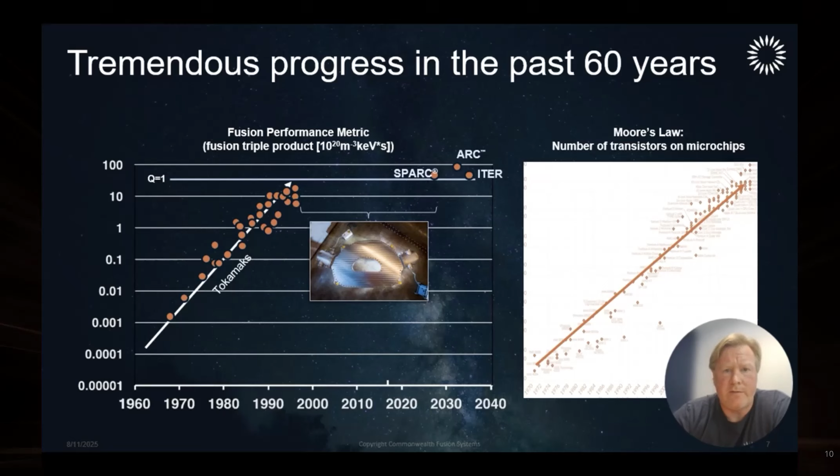And while it's not here yet, there's been tremendous progress on key fusion metrics at a pace that's faster than Moore's law. That progress stalled with the fundamental limits of key pieces of technologies. For CFS, it was magnets. For others, it may be lasers, or capacitor banks, or new simulation capacity, or new materials. All those advancements are arriving now and adding to the progress of the past, providing the path forward for commercial fusion. And so I do think that we'll have commercial fusion before 2035.

And CFS has been formed with the intent and purpose to do this. We have an approach based on proven plasma physics that's been peer-reviewed and delivered by the largest fusion company, with now over 1,000 people and more than $2 billion invested, and a team that knows what it's like to build hard things and knows what it means to manufacture at scale, who is actively engaged not just in the technology development but the ecosystem development, spearheading a regulatory path now codified into law where fusion plants will be regulated not like fission plants, but like particle accelerators.

The licensing can take a year or two, and that's a big improvement from the 10 years and $1 billion for legacy nuclear fission plants.

At CFS, we've taken a deliberate and systematic approach to risk retirement, starting with the physics from MIT's Plasma Science and Fusion Center, then moving to the magnet technology, which we demonstrated. We also demonstrated the ability to stand up a manufacturing line to build these novel technologies. Now we're integrating that known architecture with these new breakthrough magnets in our device, SPARC, here in Massachusetts. That project's now about 65% complete. And beyond that, we've already started work on ARC, our commercial power plant.

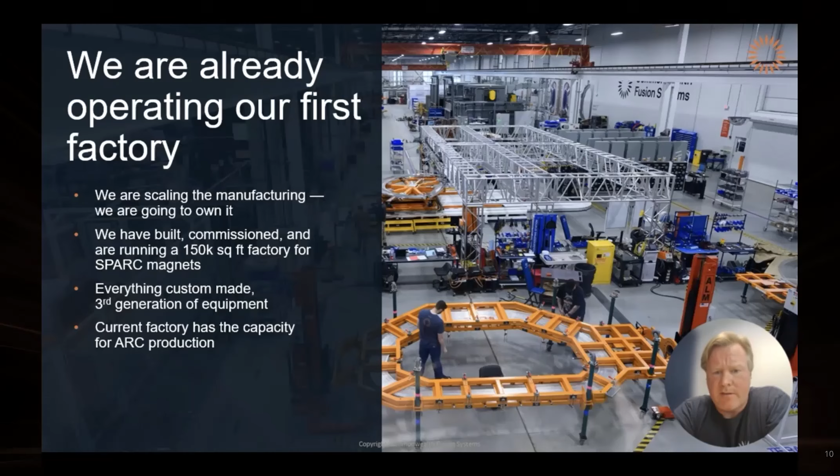At CFS, we've decided to vertically integrate on the key technologies we need. We're operating our first factory now, over 150,000 square feet of manufacturing in Massachusetts, with technicians working around the clock making magnets that will be used in SPARC. These magnets are some of the strongest in the world. We don't only make the magnets here, we also have all the test stands to make sure they're made with quality, providing the assurance we need to know they'll do what we need them to do when we need them to do it.

I'll show some pictures here. You can see some of our technicians working to meticulously insert some of the first superconductors into some of the first pancakes that will go into some of the first magnets for SPARC.

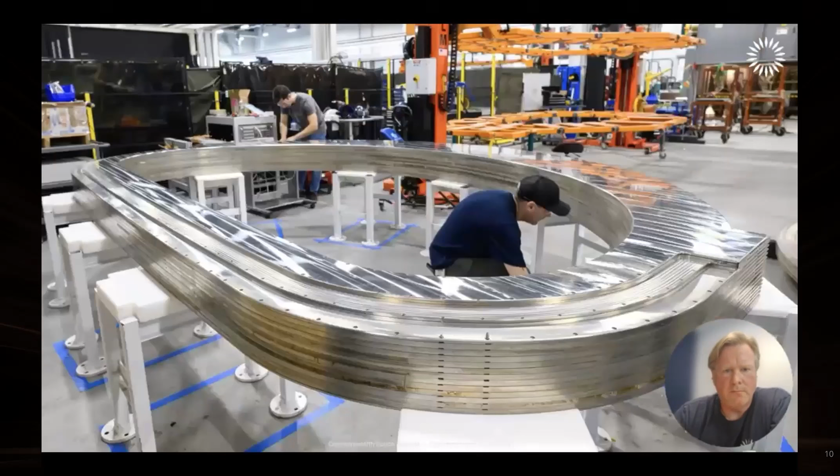Those pancakes are stacked together to make the big magnets, with the machines that put them in the right cases. The cases can withstand the enormous force that comes from magnets with tens of thousands of amps of current flowing through them. And these are the types of test stands necessary to show those magnets work.

And those magnets are going into SPARC, our pilot plant. This is an actual picture of the machine, not a rendering. It's more than 65% complete and on pace for operations in 2027. SPARC shows that a company like CFS can architect and engineer these types of machines, and that regional constructors and local talent, not the super majors, can construct a fusion machine. It includes a supply chain that stretches across 31 countries.

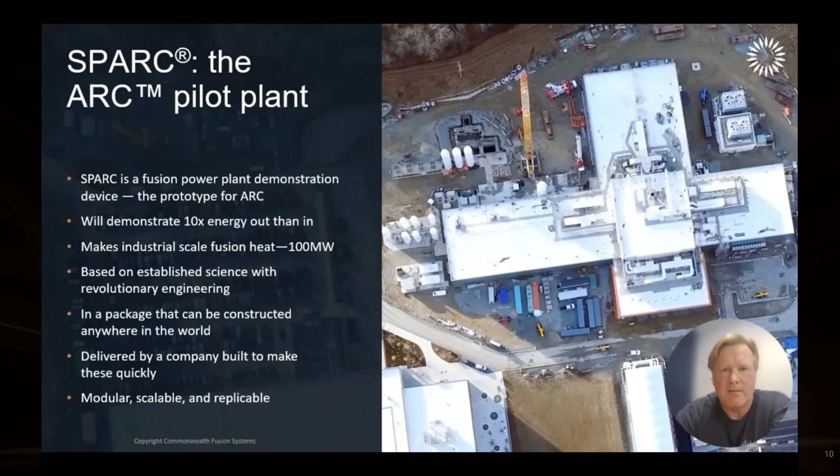Beyond the technology inside, which is truly impressive, SPARC is the proof point that CFS can execute on complex billion-dollar scale projects. And we have confidence that SPARC is going to work.

Self-critique is a core value of CFS, and from the beginning, CFS has been committed to holding itself accountable to science, engineering, and commercial progress. One of the ways we do this is through the peer review process. Since our inception, we have published more than 60 papers in journals detailing our science and engineering advancements. We use this to provide confidence to the scientific community, to our investors, and to ourselves that the fusion machines we are designing are going to work as intended.

But as I said, SPARC is really about demonstrating that ability to execute. Commonwealth Fusion Systems took over the role of architect engineer for SPARC, and since then has generated tens of thousands of work order packages to our construction partners to deliver.

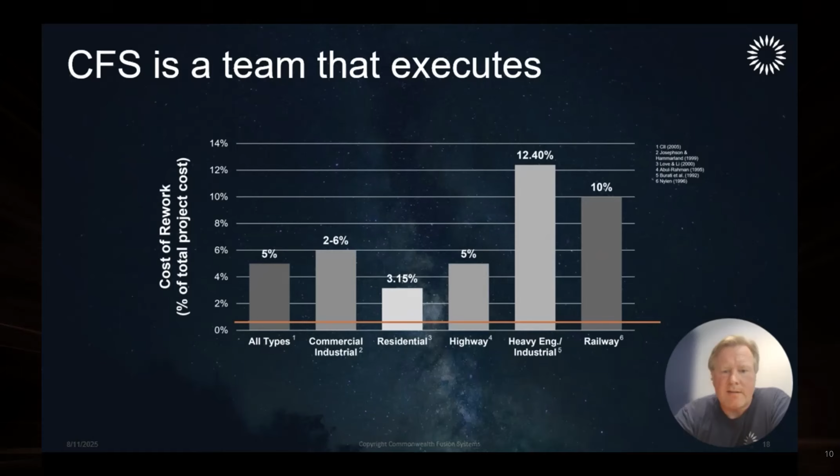In order to do this on the timelines we're looking to, we must execute with the highest level of quality. What we've seen is that through 15,000 work orders completed, we're now running about a 0.5% construction rework cost to date. That's exceptional, that's better than residential, and way better than what happens in heavy industry. It's a proof point of our ability to deliver these projects as designed and engineered.

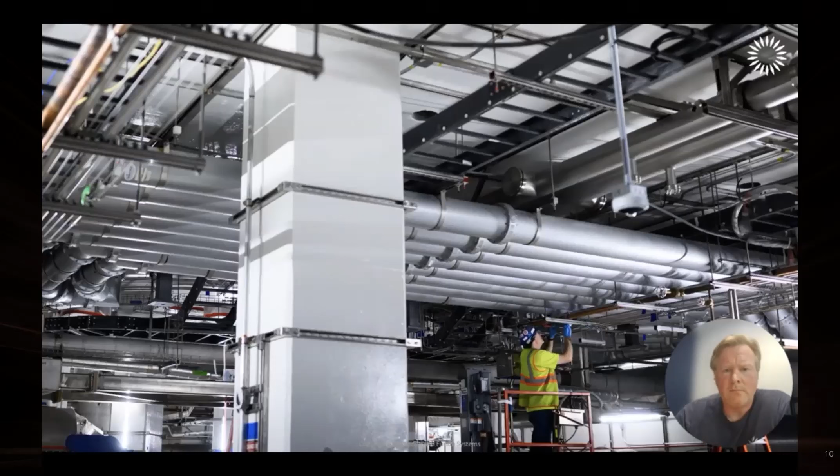And these things we're building, they're not little things. These are big, complicated, integrated and connected things. But things that borrow from other industries, like these large compressors similar to what's used in liquefied natural gas, to be able to deliver the cryogenic fluid to keep our magnets cold and confine the plasmas.

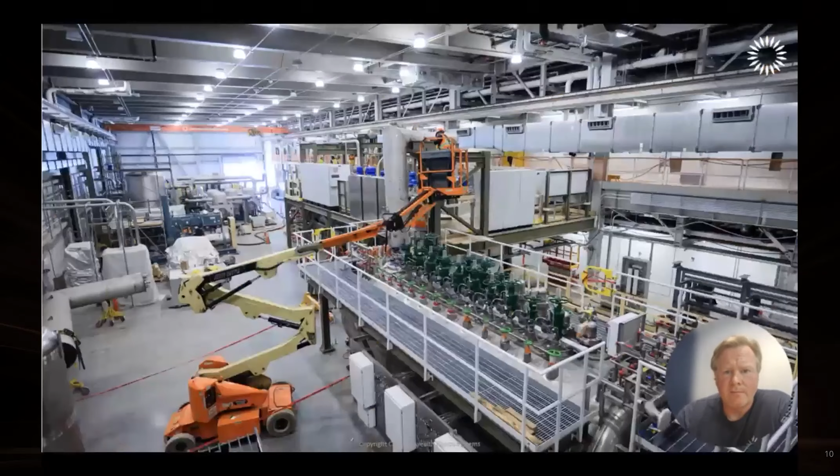And these are systems now that are being commissioned. So we have fluid in systems, we're running pumps, running valves, venting systems, turning them on, turning them off, getting operations instructions written for all these systems in order to support the tokamak operations.

As we move from building and system support construction into tokamak assembly, a lot of the long lead items that we ordered many months ago are now starting to get ready for shipment to CFS.

Ensuring the quality of those parts and those vendors around the world has been a big effort. So when I said there may be 31 countries in the supply chain, on a given day CFS has an employee in about 15 different countries working with our suppliers to ensure these items are delivered as expected.

SPARC will pave the way for ARC. Of the 17 systems you need to make a power plant, 13 of them will be demonstrated at appropriate scale inside SPARC, and the remaining systems are being tested and demonstrated in other experiments.

SPARC also will give us a lot of confidence in the commercial viability of ARC. Because we've been able to collect the receipts from over $1 billion spent, we now know how to make all of the major components we'll need for ARC, and we know how to talk to our suppliers to gain the estimates and costs, to give confidence to our investors that we'll be able to build commercially relevant and commercially viable fusion power plants in the future.

And while we continue to work on SPARC, a lot of our focus is moving towards ARC. This is where I spend most of my time thinking about. ARC will be our commercial power plant.

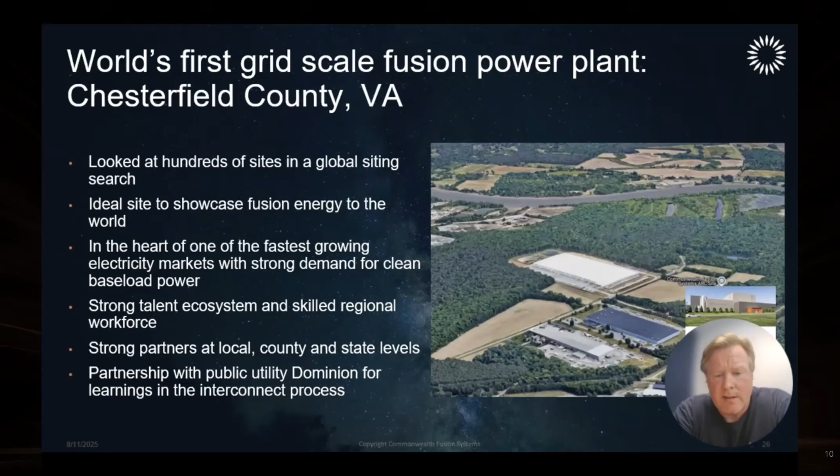But beyond that, it's also the site of some tremendous partnerships with the state and the county, and a lot of work going on to educate and inform our residents and our neighbors as we get ready to build our first power plant. That project's very much under development now.

We have an active zoning case. We're meeting and engaging with the county, the officials, and the community to get ready for that. So it's very much steps taken towards the permitting and actual development of that project.

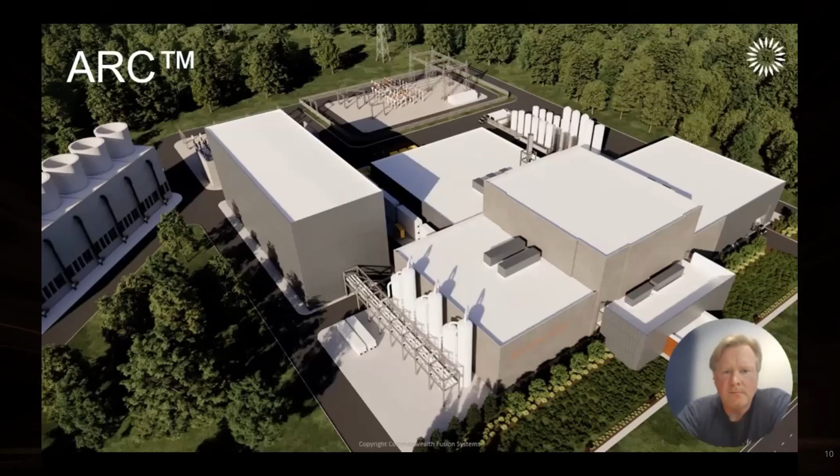Work's underway on the detailed design of ARC today. Here's a first rendering of what the plant may look like, sitting on about 25 acres of built-out land, connecting for the first time a steam turbine to a fusion device to make electricity and put that onto the grid in Chesterfield County, Virginia.

But in order to have a commercial industry, it's more than just a technology. One of the things I've been most impressed about during my time here at CFS has been the thoughtful approach to building not just a technology, not just a company, or not even just an industry, but a real movement around fusion. That movement requires educating and engaging stakeholders ranging from the next door neighbor here in Devens, about a quarter mile away, to heads of state and governors and leaders.

In between, there are a lot of people we work with in the form of the communities, our supply chain, the builders and technicians and constructors of our machines. That's a global approach to building a movement, not just here in the United States, reaching out to global leaders to try to enforce and develop the right types of regulatory frameworks necessary for fusion.

One of those key stakeholders is the regulator. The long work that's gone into educating and teaching them about the safety of fusion, both in the United Kingdom and the United States, now has us with a framework of appropriate regulations we can use here to grow an industry, but also that can be the template for other countries to take up fusion.

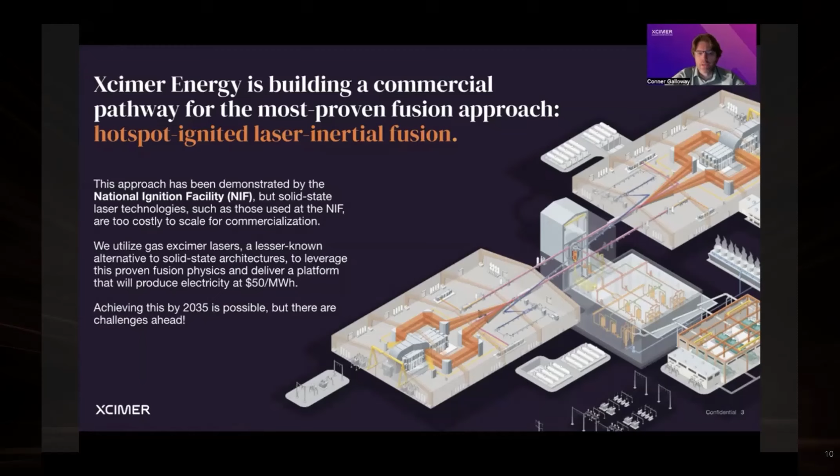So at Xcimer, we are using a lesser-known alternative to solid-state architectures, gas excimer lasers - hence the name of the company, just without the E - which are much more affordable in scaling to the energy levels needed for achieving robust commercial gain for inertial fusion. The low cost can enable great economics, giving us a path to producing electricity at a cost of energy of $50 per megawatt hour.

Laser inertial fusion is the only technology to date to surpass scientific break-even and produce a fully self-sustained burning plasma. Here is the performance of some fusion machines, with tokamaks there, and then NIF laser inertial. The record gain so far at NIF is a gain of 4.3. Just this past April, NIF achieved 8.6 megajoules of fusion energy out of a fuel capsule with 2 megajoules of energy used to drive the system.

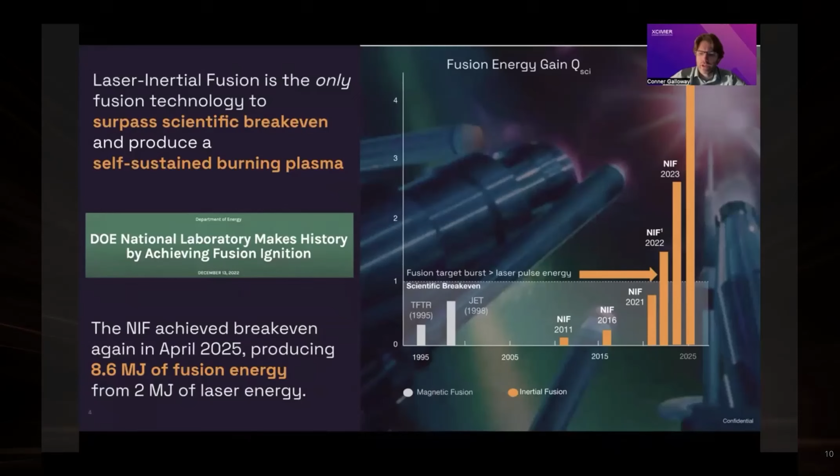Amazing achievement. What motivated myself and Alex to get started in inertial fusion was actually when we learned about what was called the Halite Centurion test program in the 1980s. This is not often discussed and not well known, but high gain inertial fusion was demonstrated during this program.

The key difference here compared to NIF was that in these experiments, X-rays generated from nuclear detonations underground at the Nevada test site were used to drive and implode laboratory scale fuel capsules. These experiments were successful, and the official statement from DOE says experiments conducted at the Nevada test site have demonstrated excellent performance, putting to rest fundamental questions about the basic feasibility of achieving high gain.

The details are classified, but Los Alamos National Lab, Lawrence Livermore, and the National Academy of Sciences all recommended the development of a laser architecture that could scale to 10 megajoule illumination, sufficient to replicate the conditions in these successful shots. So we're fortunate, based on these experiments, that we know a 10 megajoule laser is sufficient energy to enable commercial gain. Importantly, the NIF - National Ignition Facility - is only 2 megajoules because of the very high cost of the solid-state laser architectures that impede them from ever scaling up to 10 megajoules.

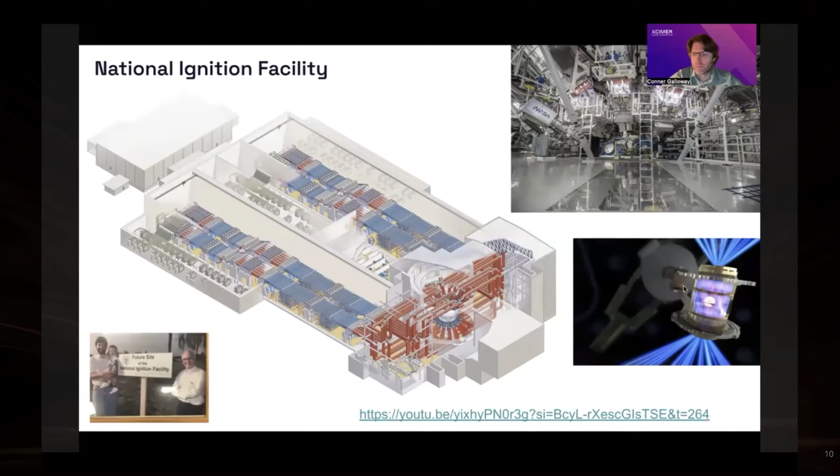So back to the National Ignition Facility. There's 192 beam lines that you see here in the picture, and all of these beam lines are directed to a target chamber and ultimately a hohlraum fusion fuel capsule, shown in the bottom right. The way NIF works is the laser energy is used to illuminate the inside of a heavy metal can.

The laser energy is converted into X-rays inside this can, and it's actually the X-rays that absorb on the fuel capsule, shown here in the middle. It's kind of a sub-BB sized ball, and it's the X-rays that drive the implosion.

It's important to note that this process is roughly 12% efficient, and it's called indirect drive. So on the NIF, while there's 2 megajoules of energy in the laser, only about 250 kilojoules is actually absorbed on the fuel capsule. This depicts the general process.

That energy is absorbed on the fuel capsule in the plastic ablator, and then the deuterium-tritium fuel is inside that. The plastic heats to tens of millions of degrees, blows off, and the fuel capsule is imploded, compressed, ignited, and a self-sustained burn wave is initiated.

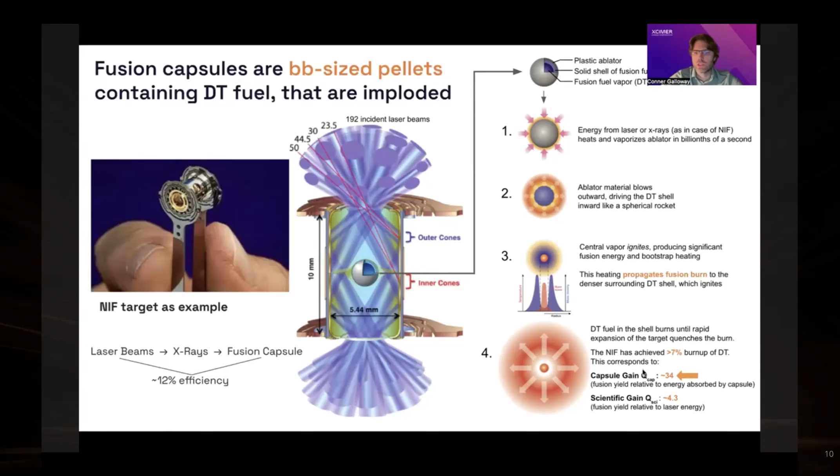What's very significant for NIF is that the gain of that fuel capsule was 34. They produced 8.6 megajoules of fusion energy on the record shot, with only 250 kilojoules coupled to the actual fuel capsule. So what we're doing differently than NIF is we have a different illumination geometry, and we're shooting a much larger fuel capsule.

Here on the left you see NIF with 192 beams. We're just going to use 2 beams with much higher energy, and so we'll be able to couple over 8 megajoules to the fuel capsule, whereas NIF is only coupling 250 kilojoules.

The way we can do this is we can beam-shape our laser beams so that the intensity around the ring of the laser spot is higher by about a 2-to-1 contrast. When you do this and absorb the laser in the target plasma corona, you can get spherical implosion from two-sided illumination.

We published a paper on this target design concept with all three major design labs: Livermore, Los Alamos, and the Laboratory for Laser Energetics, and General Atomics. It was an editor's pick in Physics of Plasmas, so I encourage anyone interested to dive in and read the paper.

So of course, how do we get to coupling over 8 megajoules to the actual fuel capsule? We need to lower laser cost, and that's what we're all about at Xcimer Energy. We're cutting laser costs by replacing glass with gas to enable commercial IFE.

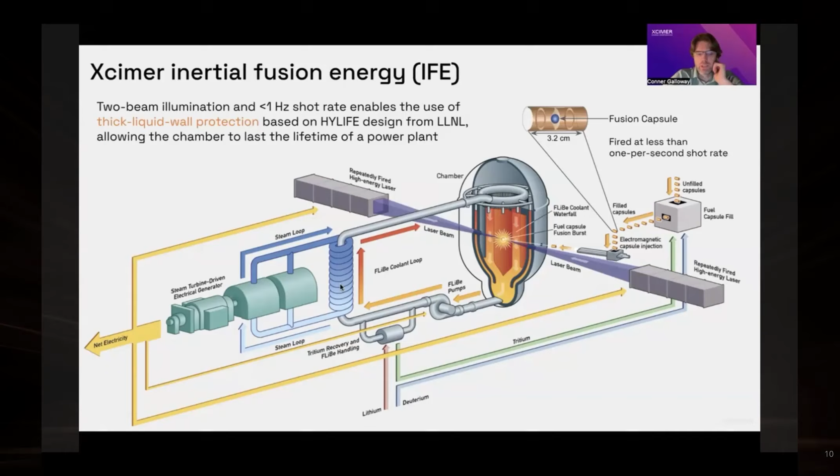We'll be shooting one target every few seconds, a few gigajoules of yield per burst, and collecting the energy in the FLIBE, which then you have to extract the tritium from to fuel future targets, and then take the heat away from the FLIBE to power a standard steam cycle.

So in summary, lower laser cost enables us to build a much higher laser energy than NIF. This enables us to shoot much bigger targets in the robust gain regime of the Halite Centurion experiments to achieve commercially relevant gain.

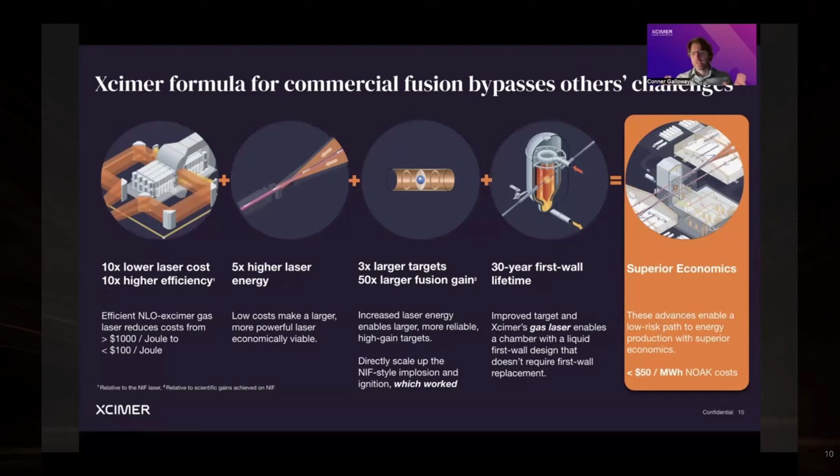The laser architecture enables us to use thick liquid wall protection so that our chamber can last the lifetime of the plant. This is our roadmap to how we can drive the cost of an nth-of-a-kind plant down to $50 per megawatt hour.

Our roadmap has 3 major phases. The first, Phoenix, is where we're demonstrating the gas optic, gas mirror technology I described earlier, as well as demonstrating that we can build KrF lasers at a microsecond plus pulse length, so we really understand how those lasers operate. The next major phase of our program is Vulcan.

This is our break-even machine, where with a 4 megajoule laser, we'll achieve wall plug break-even—meaning more fusion energy out of the burst than the laser took off the grid electrically. This system will be upgradable in place directly to 12 megajoules, where we'll be able to serve several national security applications, such as stockpile stewardship and nuclear weapons effects testing in this Vulcan break-even machine.

Then finally, by the mid-2030s, we'll build Athena, which is our fusion pilot plant to deliver electrons on the grid. This is showing a depiction of the progression of our Xcimer, or KrF, laser technology. The first 2 steps are part of the Phoenix program that I just showed on the prior slide.

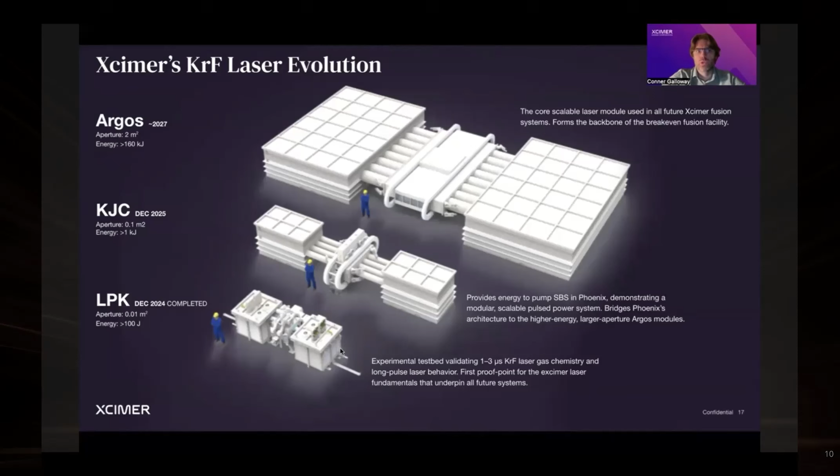The Argos module is part of Vulcan and Athena. Argos is what we will mass produce—these laser modules for all future systems. The LPK stands for long pulse kinetics, and the kilojoule system are our prototype systems that will enable us to develop new pulse power technologies and benchmark all of our laser codes so we can design the Argos module.

LPK—here's a picture of a before and after. On the upper left is an early design shown virtually in place before we raised our Series A. We completed this on time and on budget by the end of last year, and it is now fully operating, and we're actively benchmarking our laser codes and informing the design of the Argos laser module.

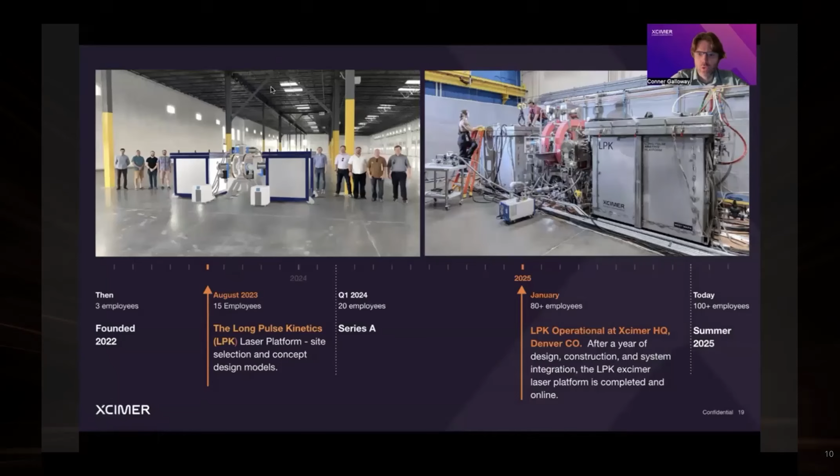Switching gears a little bit to thinking about what is needed for fusion on the grid by 2035. First, fusion performance—I think most approaches require a break-even demonstrator along the way. You have SPARC for CFS, you have Vulcan for us. Other approaches have similar concepts. It's really important for a given approach to demonstrate wall plug, facility, or engineering break-even.

All those terms are very synonymous. Finally, experience—fusion startups need to learn by doing. This is important because the past major big machines, like the Z machine, the Jet Tokamak, NIF, were all built decades ago. So the designers and builders have retired, and these were one-offs, so supply chains were not industrialized to support mass manufacture of the components for these one-off machines.

So companies have to learn by doing. Companies have to not just learn how to build complex machines, but learn how to build teams that can build the complex machines. This takes a lot of iteration, and this is sometimes often overlooked in thinking about timelines.

Also, talent—you need the best people in the world. As I mentioned, there's a lot of great scientists who worked on the development of the machines in the government decades ago that are now in their 70s and even older. So companies need to consult with these individuals.

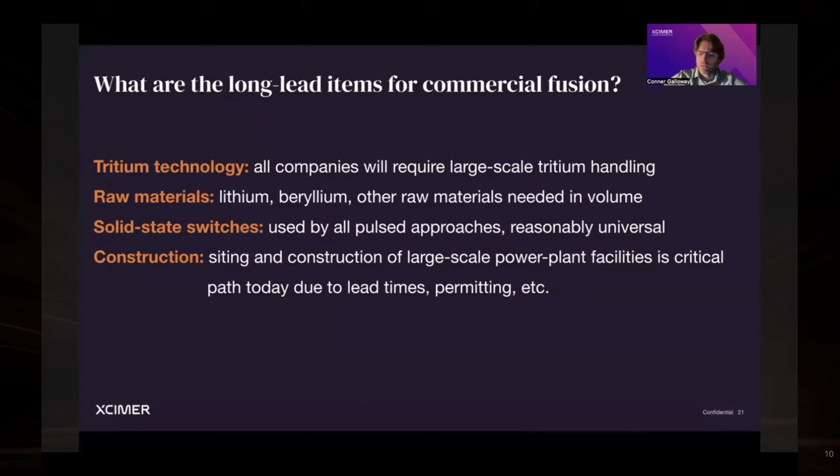Solid state switches are used by all pulse power approaches, including Xcimer Energy, since our lasers are pulse power devices, and this technology development is a 5 to 10 year time frame. Finally, construction, siting, and permitting—states need to get educated on how to license not just reactors but break-even machines, and this takes time and design cycles.

Finally, I want to comment that fusion is a global race, and China is moving fast. China is currently building a larger version of NIF in Mianyang. There's a lot of debate as to what energy level this will be at, but it seems like it will definitely be over 3 megajoules, and they have the billions to spend to build a solid state system at several megajoules of energy. Xcimer, on the laser side, is the only path for the US to compete on both speed and laser energy in order to compete with China.

Because if China builds this, they're going to have a stockpile stewardship capability that surpasses the United States. So it's not just energy security but other national security items the US needs to be concerned about with respect to China. Finally, to conclude, we need more money in the Milestone Fusion program—only $50 million was allocated to 8 companies, whereas in the NASA COTS program roughly $500 million went to 2 companies. We really need to step up our game in the United States, educate members of Congress and the public on the importance of public-private partnerships, and bring more money into the program.

And with that, I'll conclude and thank everyone for listening to me talk a little bit about Xcimer and our views on the fusion industry. Thank you.

Hi, my name is John Tomko, and I'm the Principal Product Development Leader for Capacitor Film here at Peak Nano. We're a supply chain company working on providing a solution to power handling, particularly in the form of vastly improved dielectric film in order to replace current polypropylene capacitors.

I know that's different from most of the fusion folks, but hopefully this ties in later and we see the importance of it. The outline should be pretty straightforward: since we're not a mainstream fusion company like most presenters, I thought it'd be useful to give some background on Peak Nano and our efforts overall, which will naturally segue into a discussion of our core technology and how it's differentiated from current market options, with particular emphasis on how this fits into the fusion ecosystem.

I'll then wrap this up with more discussion on fitting into that ecosystem further, by providing context on our experience with the fusion supply chain in areas where I think we can put particular emphasis within the fusion community to improve the supply chain as a whole.

I'll start with Peak's introduction. We have this mission statement of delivering nanoscale technology with macro-scale benefits across a number of sectors. What this really means is that we use a bottom-up approach to material design that lets us make a new material that fits into pre-existing systems. It's a drop-in replacement. We aren't trying to make new quantum computers or anything like that. You'll still end up with a complete macro-scale capacitor, in this case, but this layered metamaterial-based design gives you much better net properties than what's currently on the market.

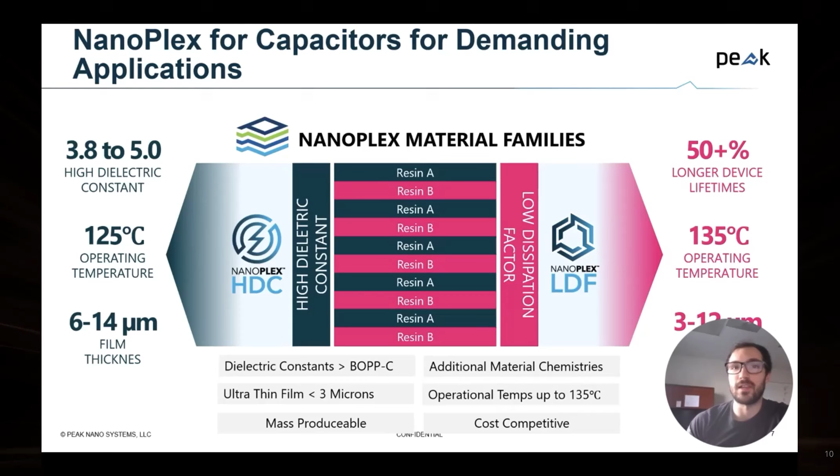Again, the current industry standard I keep mentioning, polypropylene, specifically what I'll now refer to as biaxially oriented polypropylene, or BOPP, just for simplicity. This is where polypropylene is extruded into extremely long sheets of plastic - we're talking 40,000 meters length, typically the manufacturing limit. Then we take that film and stretch it along both axes. This stretching process, this biaxial orientation, really orients the crystalline domains within the material. In doing so, you take an okay dielectric material like polypropylene and give it significantly better dielectric properties. BOP is pretty much the standard across the world for all energy applications.

If you go to the grid, for example, you'll see large substations running hundreds of BOP-based capacitors. The reason for this is mostly because you can intrinsically scale the manufacturing to this as needed, and it gives you dielectric properties that are pretty okay.

Just for a sense of the manufacturing scale, we're talking about probably about 1 billion pounds of material a year just in power generation. Again, this is because of BOP's excellent manufacturability - it has pretty good room temperature dielectric properties. But even with all that being said, it still falls short in some ways.

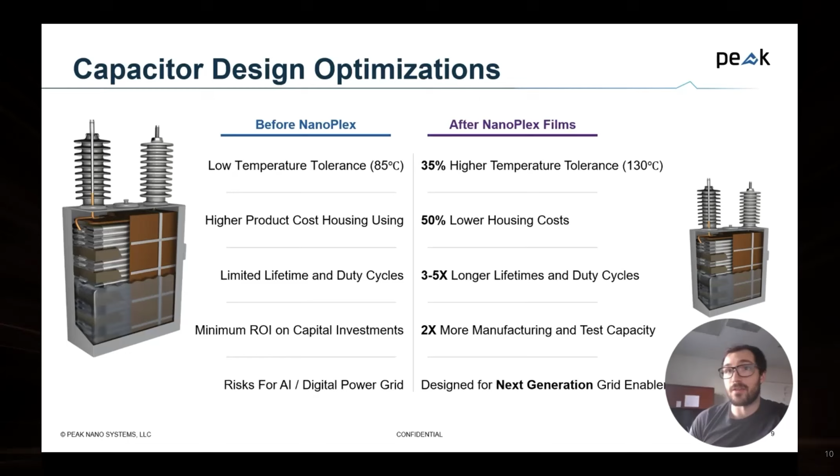A really good example of this is HDC, the high dielectric constant material. I'm going to jump back and forth between the two material systems here. We can see the variety of properties, and as soon as HDC is compared to BOP, we're getting a factor of 4 volume reduction just because of the improved energy density of this raw film.

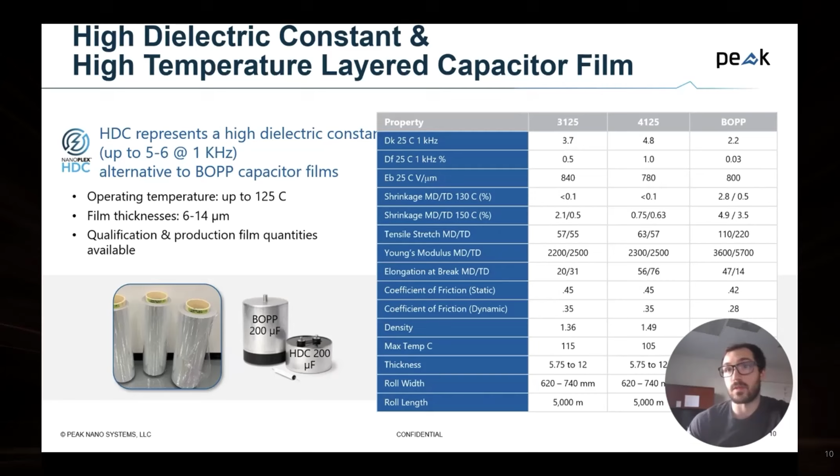This isn't to say it's the perfect material with no trade-off. You can't put this in every application, to be clear. There's a measurable increase in the dissipation factor, but that's not all that matters—you can play some tricks to improve your equivalent series resistance. For pulse power applications, where energy storage density really is your primary factor, this becomes an excellent material system compared to BOP. You can tune the properties between 3.7 and about 5-ish across the different product ranges Peak Nano offers.

So again, you have that aspect of tunability for different material systems or needs in the power grid. When we're talking about non-pulsed applications—running at really high frequencies or just DC current applications—you're really talking about heat resistance as the primary factor of interest. I'm intentionally using the term heat resistance loosely because it's a really nuanced aspect when we start thinking about it.

In some situations, like in power electronics where we're implementing silicon carbide everywhere and it's naturally being pushed to 200C operational limits, I'm using heat resistance in the form of whether the film can sustain the same operational temperature as the device itself. Because if it can, I remove the need for active cooling. In other words, my capacitor can run at 200C or very high temperatures without active cooling, and my engineering constraints are simply reduced.

But there's also this hidden secret on the longevity of the capacitor in terms of heat resistance. When the capacitor is run at any temperature above room temperature, BOP gradually gains a derating factor where its capabilities are reduced from room temperature. And just from internal heating, the temperature of the capacitor can easily reach 100C in terms of hot spots, which leads to derating. This derating is usually in the form of lower operational voltages, but it also leads to reductions in lifetime.

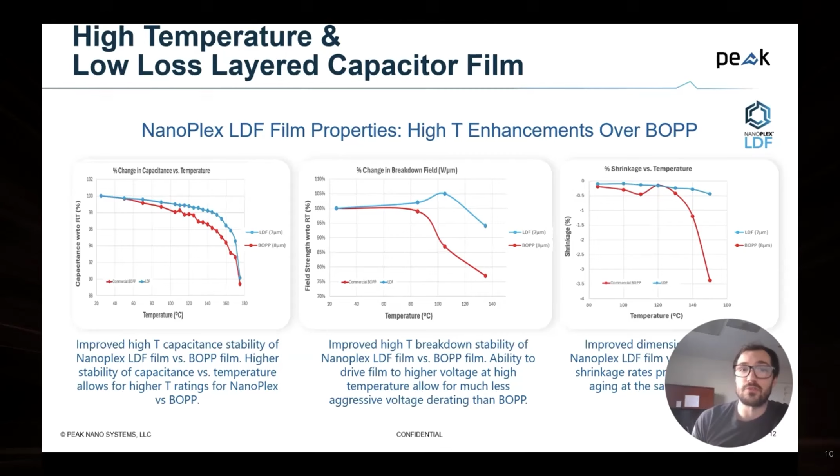To highlight this more clearly, consider two capacitors made identically with our LDF film versus traditional BOP. In the case of BOP, the capacitor actually has to be derated by over 30% at 125C, whereas Peak Nano's LDF film only loses 5% of its peak performance. The same is true for that LDF film's energy storage density or capacitance, which can operate significantly hotter. This increased cutoff limit on max operating temperature leads to a direct correlation in net lifetime, where small hotspots in the device, in the case of LDF, don't lead to detrimental thermal runaway because the capacitor is more tolerant to these conditions.

And so this thermal stability is really the direct result of Peak Nano's core technology, which is the production of nano-layered polymeric films. In the case of LDF, the direct drop-in replacement for BOPP, we have much better lifetimes and thermal stabilities. This is achieved by taking the same cap-grade polypropylene you find in every other capacitor and layering it against a high glass transition glassy polymer.

In doing so, the polypropylene effectively becomes stuck within these rigid, well-defined boundary layers. This means as temperature or other stresses are applied to the film, like high voltages, the material resists strain and becomes locked in, giving constant performance. Because the material is primarily polypropylene, the cost is actually very comparable to BOPP, and it drops into the same capacitor system with minimal additional engineering effort.

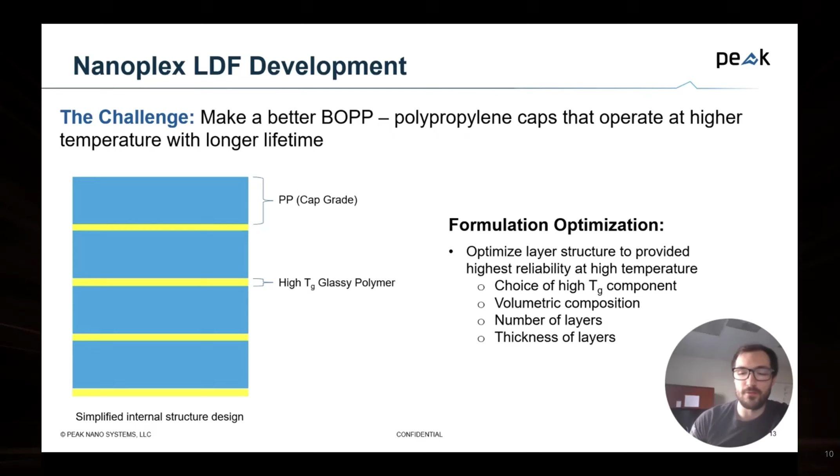So now, I showed that nice SEM micrograph earlier, and I'm used to seeing micrographs of this perfect 100 nanometer region of a super lattice—everyone calls it the next big thing in their Nature paper, and then you never see it go anywhere, mostly because if you move a little bit over, you start seeing interlayer mixing and things like that.

With all this technology, Peak Nano is really making material that can greatly improve the quality and lifetime of capacitors, particularly for the high current needs you're seeing in the fusion community right now.

While our obvious customers are capacitor manufacturers, since we make the raw film, these capacitor manufacturers will take their capacitor and sell it to someone building a power module or capacitor bank, and that system is what you'll end up buying as the end user of a fusion company, maybe. So at the end of the day, Peak Nano is pretty far up the supply chain, admittedly.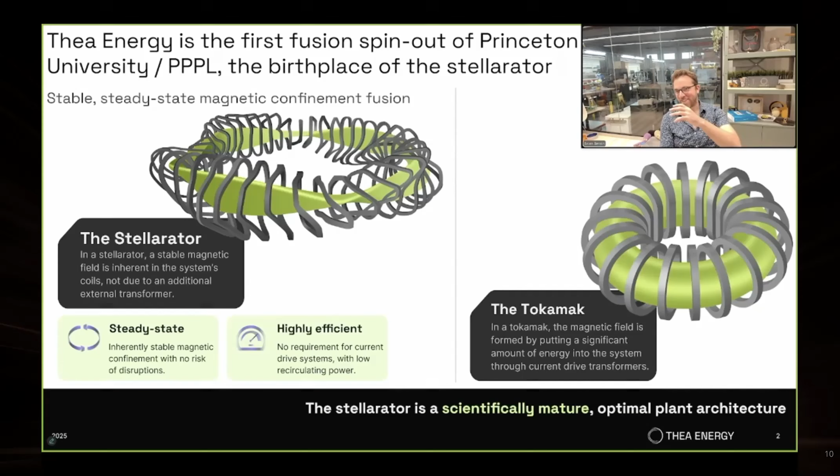A number of these devices that were built went 10 years behind schedule, billions of dollars over budget. And while that's allowed for a first-of-a-kind scientific research project, if you're building a power plant based on these technologies and the result is billions of dollars of cost overrun and a decade of schedule overrun, that's not a very good product.

So the foundational concept behind Thea Energy is how can we eliminate from hardware precision and complexity? To be clear, we're not proposing any magic bullet here. We are not eliminating precision and complexity outright, but what we are doing is we're transferring it from hardware to software. So within our architecture, we utilize an array of about 400 planar superconducting magnets.

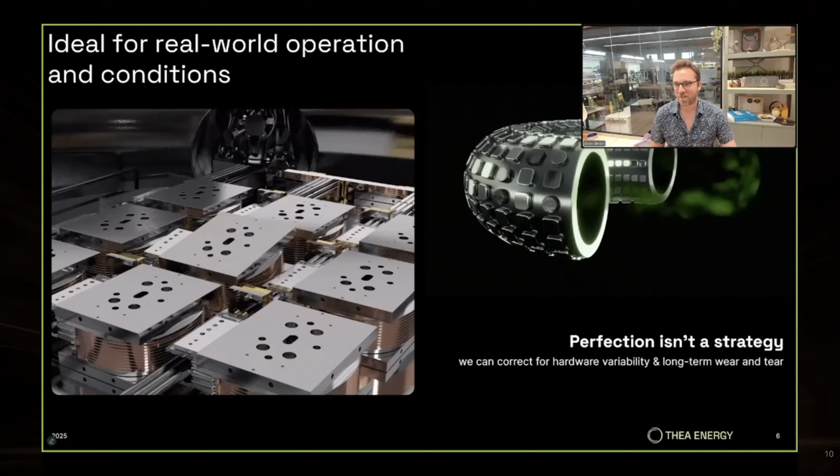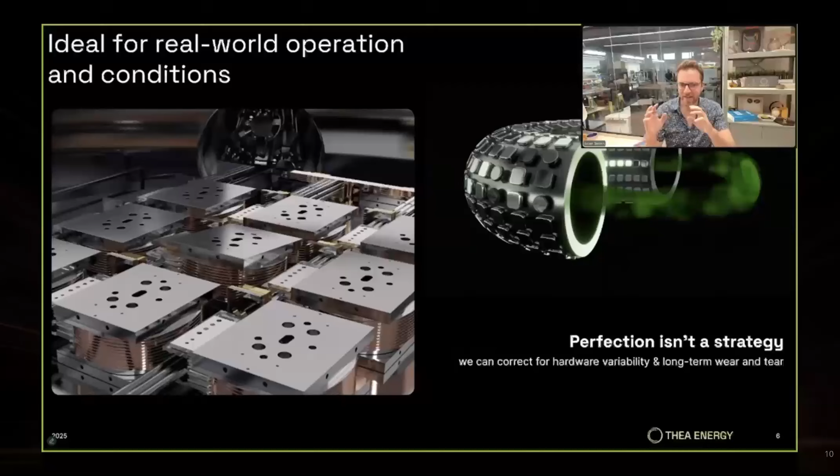Most of fusion right now is focused on perfect lab environment conditions to make fusion happen for a fraction of a second. We at Thea are really trying to focus on what happens when magnets or other system structures wear over time. That's something that allows us to have a system architecture that can self-tune, that can dynamically change parameters as this happens over the course of days to months to years. Therefore, you'll have a device that continues to run at a higher capacity factor with a lower O&M maintenance cost. That is the practicality that we're really, really focused on.

Another major advantage that we've really just started to uncover here is by having a software layer that touches all parts of the system and can tune things, we now have an architecture that over time we can actually provide the system with updates. So there are parts of this world, especially for fusion research and plasma physics, that we're continually advancing, and we're continually getting better at it.

Turbulence modeling and suppression is one of those areas. Over the next 5, even 10 years and beyond, we will continue to have better models and simulation tools for understanding turbulence, and ultimately making lower turbulence in your device. For most other fusion architectures, if you learn something new, you redesign the system and the next one is better. But this one is kind of stuck where it is forever.

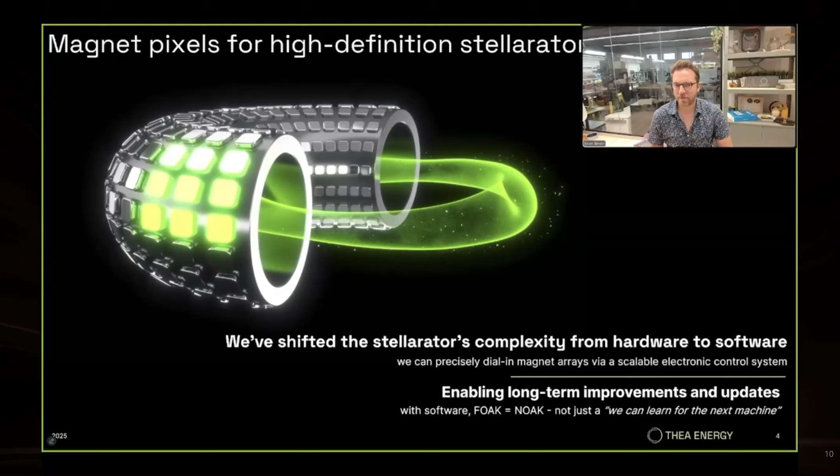With this architecture, with this phased array approach to the Stellarator, we have an advantage to provide the system with a software update, a control system update, and therefore actually have higher performance even though the fixed hardware is the same. So this enables continual improvement of a fixed asset rather than just learning and doing better for the next machine.

So I've spent a couple of minutes talking about the advancements and the results to date with our hardware. I want to talk a little bit about where we're going and the path to actually commercialize this technology. We're getting really good at manufacturing these superconducting magnets. We're scaling up production. We've built the control systems that we need. The next step for us is to build an integrated system based on our technology.

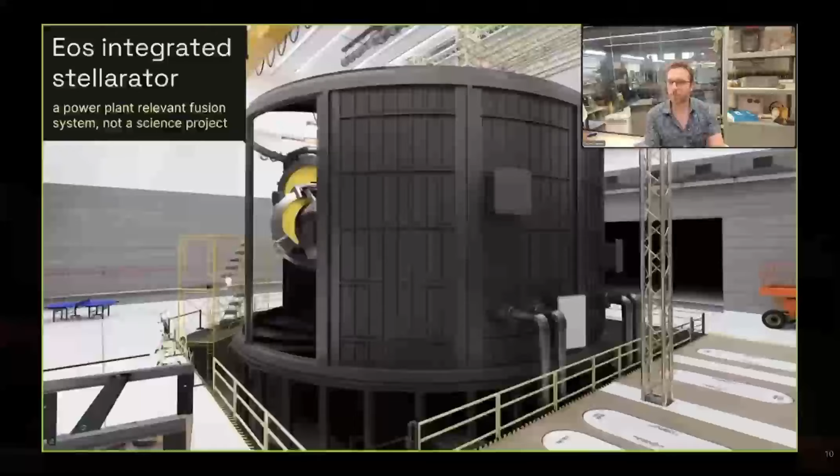This device, which we call EOS, will use our planar coil system architecture to create a decent high triple product, and also do so in steady state, as pretty uniquely only the Stellarator can do. So this device is our proof of concept that not only shows an integrated system fusion performance, but just as importantly is a 70% linear scale of a power plant, a large scale system that allows us to do all this systems integration, procurement, and engineering of a power plant scale device.

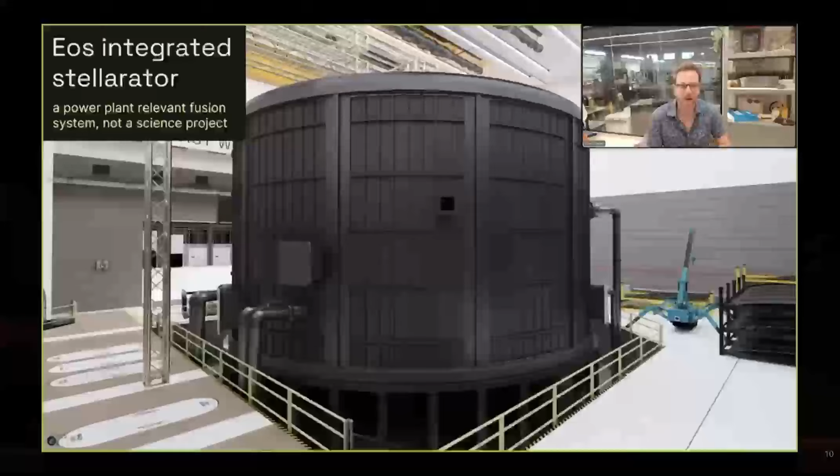Science is really important to fusion. Technology and engineering are really important to fusion. A lot of the practicality of operating utility scale power plants comes with the execution and buy down of programmatic risk of actually constructing the device and the facility. So this upcoming project, which we plan to have operational around the end of the decade, allows us to go one step further than just system technology development and scientific verification. It allows us to buy down the programmatic and execution-based risks of a power plant scale asset.

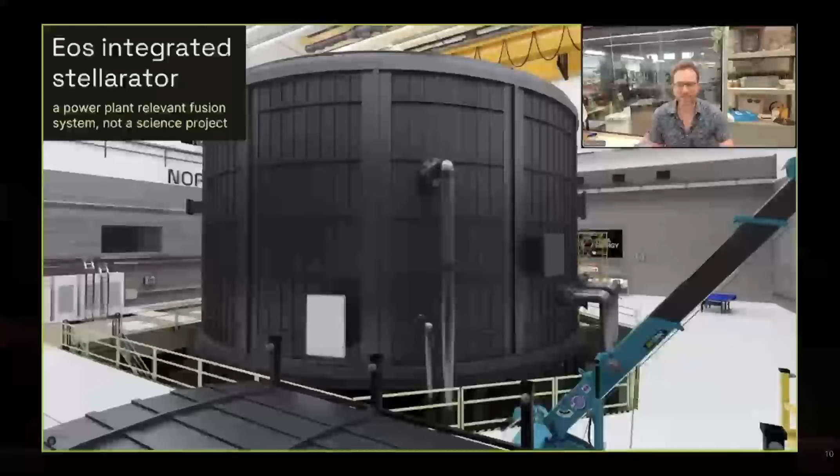So for this device, we're going to be nearing about the 10% design completion later this year, at which point in 2026, next year, we will actually choose a site as to where to build this. So some really exciting stuff coming up for Thea Energy. By designing, constructing, and operating that device, we have a really clear path to how we commercialize the technology and its final architecture, a power plant.

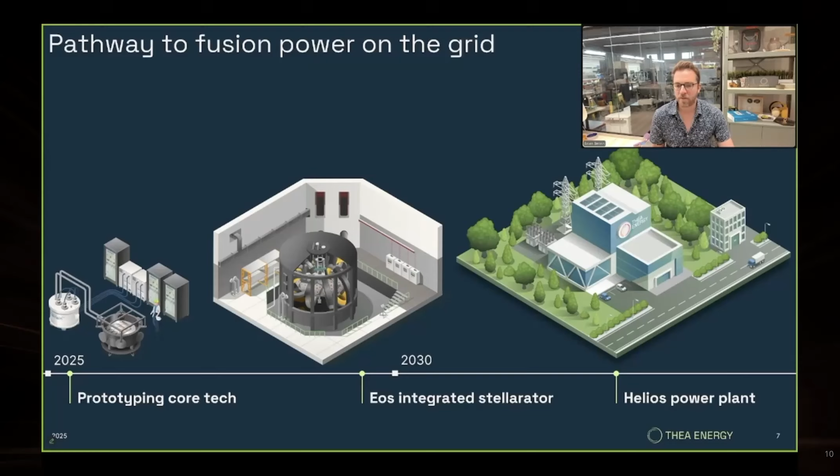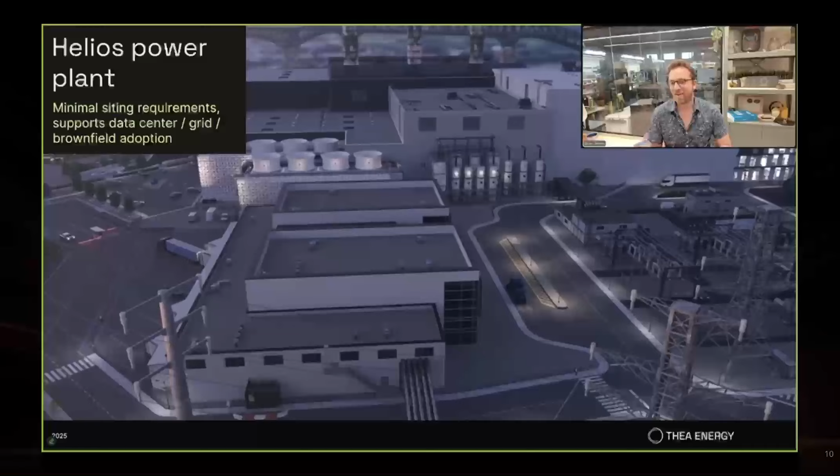So this device will be a scale-up of EOS. It will also change the fuel mixture. EOS will be a DD fusion device. It will be subscale. We are going to be working towards a DT fusion power plant. And by changing the fuel mixture to DT, scaling up, we will have a very efficient system in terms of its ability to create on-the-grid electricity.

Double-clicking in on that one for a second, within the various fusion architectures being proposed now, a lot of people are thinking about Q greater than 1 on a scientific basis. The advantage of the stellarator that we're really focused on commercializing is, back to the beginning of this conversation, relating to the steady state nature of that plasma.

So the stellarator shines because in a stellarator you can reach this point of ignition. Ignition is a self-heating plasma where you get to turn off a lot of the energy recirculation. And that allows you to have an architecture that creates a lot of energy, which you can then put on the grid rather than having to pump it back into the device to restart a reaction, to squeeze a plasma.

There are a number of different ways you would potentially want to recirculate energy in inertial confinement and other forms of magnetic confinement. But for the stellarator, it's a complicated system with that very specific French cruller shape. If you can make that device, you can create a highly efficient power plant architecture where most of the energy created can be utilized for the real goal: to create electricity and put energy onto the grid. So we're really excited about the path to commercialize the stellarator, because building an integrated system that is steady state scales from an economics perspective very nicely to a power plant.

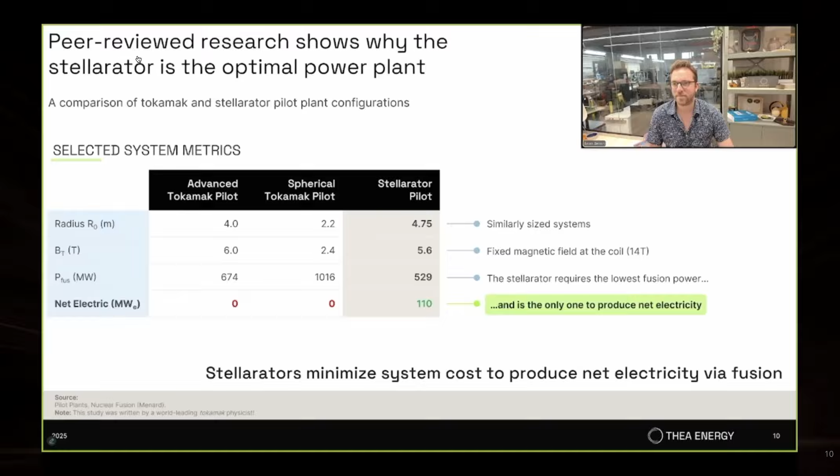I'm Will Regan, president and co-founder of Pacific Fusion, and I'm here today to tell you about our plans to develop affordable power using pulser-driven inertial fusion, with net facility energy gain by 2030 and the first power generation by the mid-2030s.

There were three major breakthroughs that happened in 2022 that really transformed the fusion landscape. First, the National Ignition Facility used lasers to drive the first controlled fusion ignition, achieving the physical conditions needed for commercially relevant fusion. However, since the NIF's lasers are less than 1% efficient, we still need a more energy-efficient way to access these physical conditions. Fortunately, at the same time, Sandia's Z facility reported record-setting pulser-driven inertial fusion results using a much more energy-efficient path to ignition than lasers.

By driving their MagLIF concept with a pulsed electrical current, Sandia achieved the second-highest fusion performance ever, second only to laser fusion. This MagLIF approach has the added benefit of using lower-complexity targets, which will further ease the path to commercial power.

And lastly, that same year, the team at Lawrence Livermore National Laboratory, led by our now CTO Keith LeChien, demonstrated an even more energy-efficient and mass-manufacturable pulse power technology than what's used on the Z facility. This new pulse power technology is called an impedance matching Marx generator, or IMG, and it opens up a path to build practical and cost-effective fusion machines. So when you take these three things together, it shows that we can achieve conditions needed for commercial performance, that we can get there energy efficiently, and that we can do so with affordable, mass-manufacturable hardware.

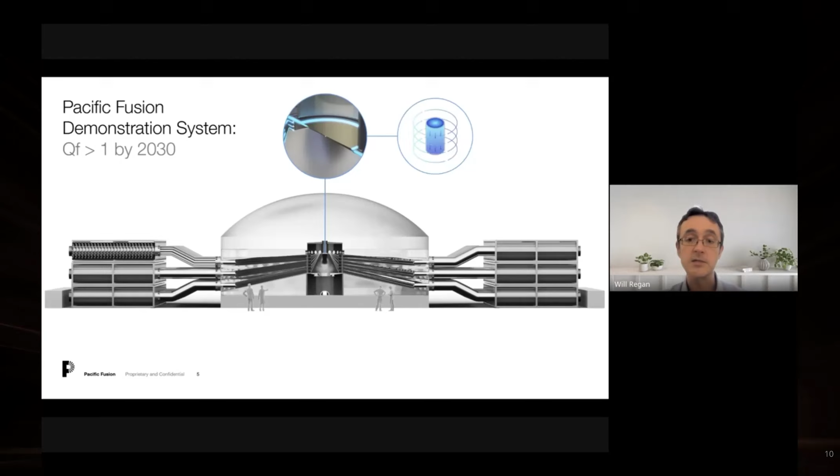So if you look at that overall, it's roughly 1,000x increase in performance per cost. And if you compare us to other major facilities like Z, we can drive over 2x more current through our targets, over 60 mega amps compared to Z's 25 mega amps of peak current. And that's important for us to get the conditions needed to get not just ignition, but facility gain, high gain.

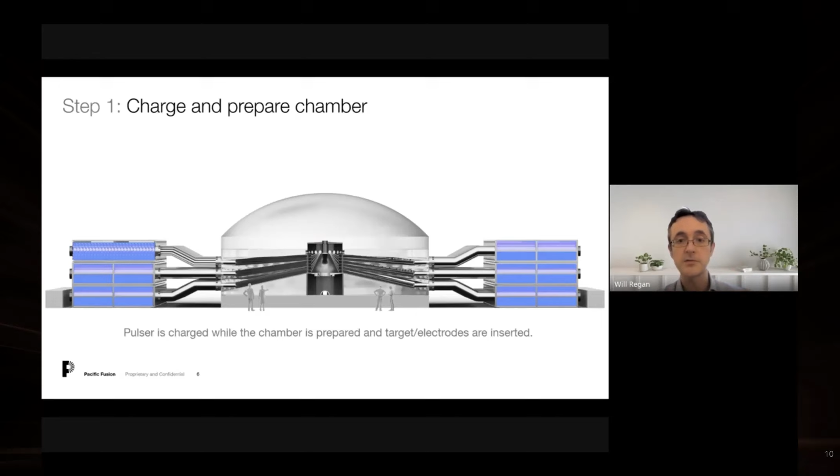So here's how the system works. Effectively 3 steps. Step number 1, you charge up your capacitor banks while you load a fuel container in the central fusion chamber at the center of the machine. Step 2 is you discharge those capacitor banks, sending a large electrical current pulse traveling inward along these transmission lines, these wires. And then third, you direct that electrical current to a tiny fuel container, our target, that holds a few milligrams of DT fuel inside.

And that electrical current creates a very strong magnetic field that rapidly implodes the can and squeezes the fuel up to fusion ignition conditions and high gain.

In our demo system, we'll be taking only about 1 shot a day and measuring all the output with a sophisticated suite of diagnostics. You can read about some of those diagnostics in our AMPS paper - affordable, maintainable, practical, scalable. It's our technical roadmap we shared on the arXiv a few months ago and is coming out in a peer-reviewed journal shortly.

In a power plant, though, we'd be harnessing that output and using the neutrons to breed more tritium in a blanket.

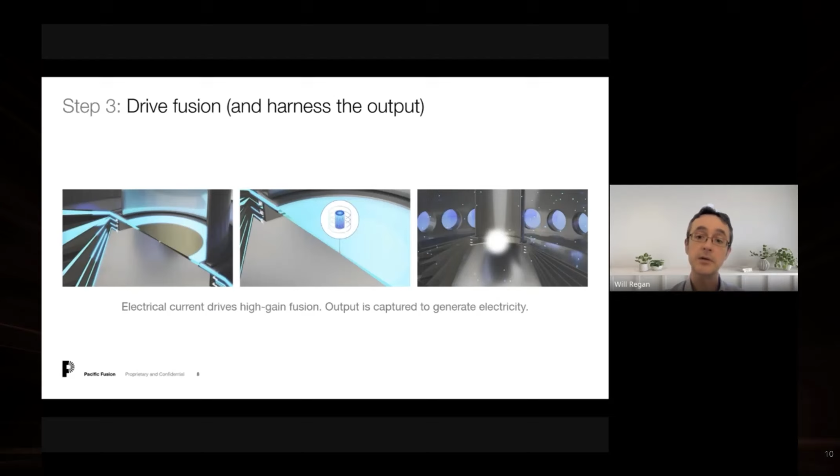Okay, so I've showed you what we're building to achieve net facility gain by 2030. What else do we need to make power by the mid-2030s?

So we'll actually need to build a new system that looks pretty similar to the demo system. Same footprint, roughly about the same amount of stored energy. The main difference in this new system is that it has to cycle not just once a day, but about once every second or a few seconds.

We'll also need to capture that energy output to generate electricity and siphon off a small fraction of that generated electricity to recharge the pulser and to power other systems. And then finally, we'll need to close all of the material loops.

So after every cycle, every target we fire, we'll need to capture and recycle all of the unburnt fuel. We'll need to capture and recycle all of the non-fuel target materials, and we'll need to process the blanket that's catching all the neutrons, breeding tritium, and capturing the heat.

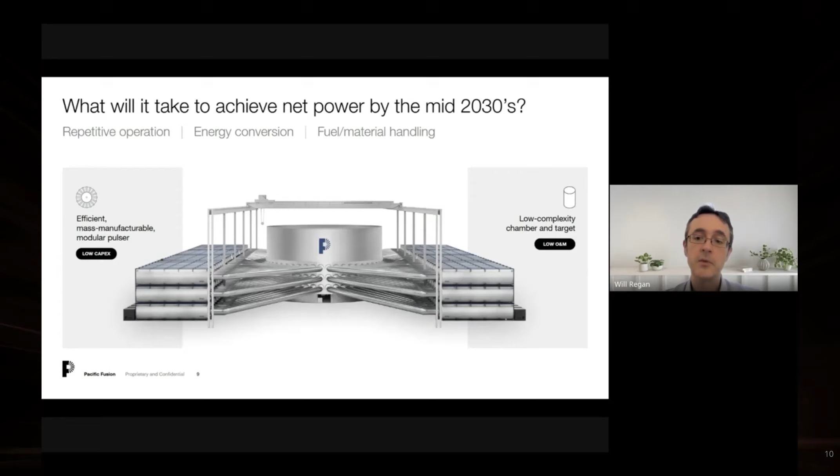So as we drive toward facility gain on the demo system, we're ramping up development basically across all of these areas in parallel.

And we can't just be content to build one power plant that works. That's not the goal. The goal is to build machines that deliver the world's most affordable firm power. And to do that, we need to be constantly improving, simplifying, eliminating components, accelerating production of every single piece of our system to ensure that it's affordable, mass manufacturable, and as maintainable as possible.

Our IMG pulse power architecture already lends itself pretty well to these challenges. It's built in a very modular fashion, starting with a small unit called a brick, made up of 2 capacitors and a switch. Those capacitors are about the size of a lunchbox, so that's a pretty small unit.

You then take about 10 of those bricks and attach them to a common anode ring that forms what's called a stage. And then you add up a bunch of those stages in series to form a module about the size of a shipping container. The majority of our system is just carbon copies of that module - about 156 in our demo system, a similar amount in the future power plant.

So that lends itself well to mass manufacturing and scale deployment. Certain supply chains do still need to be scaled up, things like fast pulse capacitors, but nearly all of our system is built from low complexity parts and widely available materials, things like metal, plastic, oil, and water that you can source pretty much everywhere. So that helps keep our capex down.

On the OpEx side, O&M costs, we're designing all parts of our system for easy serviceability and long life. And finally, to keep the fuel costs low, we're specifically developing our targets so that they have a path to low-cost mass manufacturing. This is thanks in part to their cylindrical geometry and fairly low complexity compared to other inertial fusion targets.

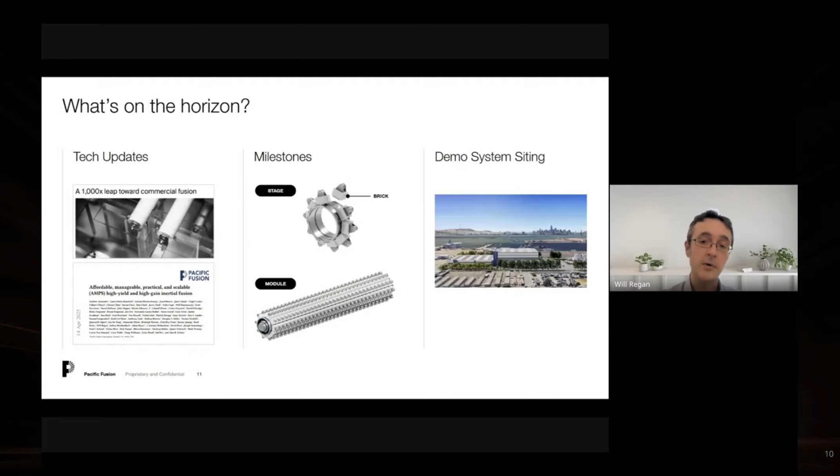So at Pacific Fusion, we always aim to make the fastest progress that's physically possible. So in that spirit, I yield my last 10.5 minutes, and I really look forward to your questions in the live session. Thank you.

Good morning. This is my real pleasure to be this morning in front of you and to contribute to this very important workshop concerning the 10-year shot clock vision to fusion energy production, or maybe at least a big progress of fusion developments by 2035. Clearly, this topic is of importance for the entire community, and I'm here to witness, in a sense, the opinion or the position of the ITER project in this respect. I will try to discuss what are the challenges that we see here from ITER and what are the kind of solutions that we can elaborate all together.

My name is Alain Bécoulet. I'm the head of the Science and Integration Department here in ITER. I'm the chief scientist and in charge of both the science development, the research plan, but also the entire configuration and the maintenance of the requirements all along the development of this project.

The outline of this talk is the following. So after a very short introduction, I will try to give our opinion of the landscape of the remaining R&D challenges that we have in front of us between now and the moment we can produce energy with fusion, and give some ITER considerations and contribution to this effort and the way forward.

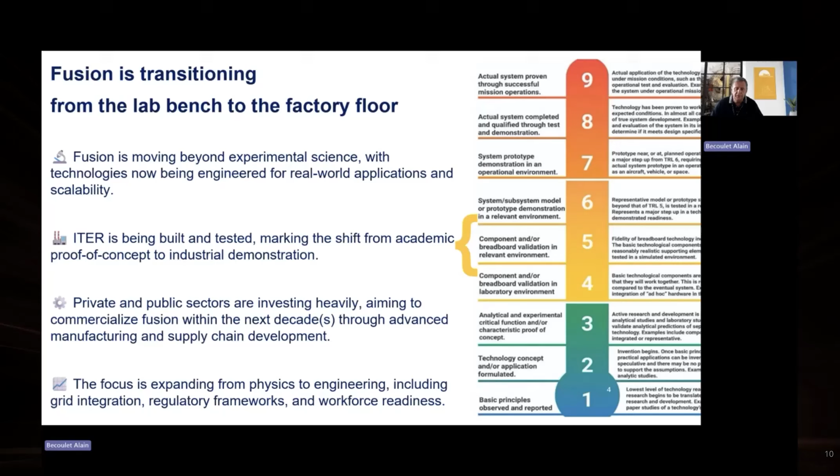To discuss the landscape of the remaining challenges, I want to refer to something developed under the auspices of the IAEA last year. Many of us contributed, including the US DOE, several private sector initiatives, and the FIA was part of this development. The IAEA edited a document called the Fusion Key Elements, endorsed by the World Fusion Energy Group, launched by DG Grossi last year.

This document is not a roadmap. It is a strategy, a shared vision for fusion energy development, covering a large number of aspects in a very condensed document. So I encourage people who haven't read it to go and have a look.

In this document there are many elements. I have extracted a number concerning the remaining challenges. First of all, there is a list. We have selected, among many, some really burning R&D challenges in terms of engineering, listed here.

I'm sure nobody will be surprised, but the first in this list is clearly the materials that have to be resilient to extreme conditions and long pulse operations. For DT fusion we need elements resisting high energy neutron fluxes, and also harsh thermal, radiation, and vacuum environments, while preserving plasma purity, which is extremely important for performance. For DT fusion again there is also the question of the fuel cycle.

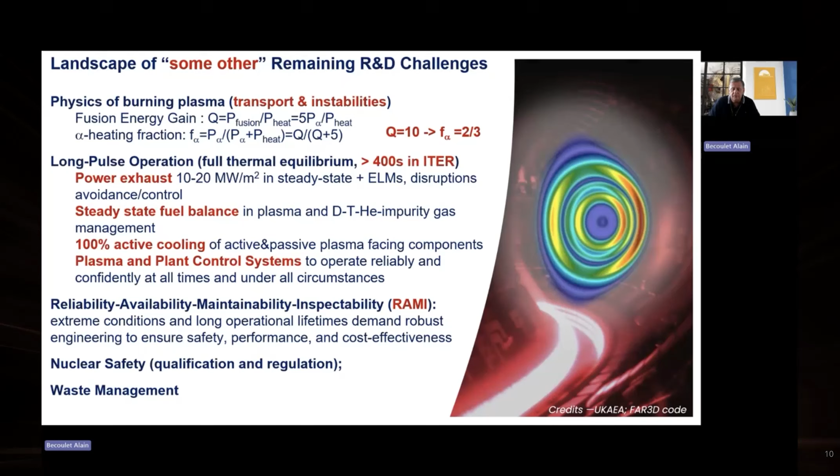You can twist all the scaling laws one way or the other, at constant beta n, at a given safety factor, constant Greenwald fraction, etc. You have several ways of manipulating both the Q factor and the fusion power flux to the scrape-off layer. But one way or the other, the result is the same, a sort of stubborn result. The figure of merit really scales like basically B and R to the same kind of power. So you can gain a lot in the major radius if you gain a lot in the magnetic field. So doubling the magnetic field is certainly a good idea to start with, to make machines smaller.

But as I said, the physics is stubborn here, and if you try to have machines that are smaller in size, you immediately face the fact that fusion power is produced in a volumetric way, but is exhausted in a surfacic way. So by reducing the major radius, you increase the flux to the plasma-facing components, to the edge, by a factor that can vary, but it is important to keep in mind. This means that if you double the magnetic field, which enables you at a given fusion gain to gain on the major radius by a factor of typically 2 or an equivalent factor, this comes at a cost, and the cost is a significant increase with the scaling laws I have exhibited here, but we can discuss for hours on that.

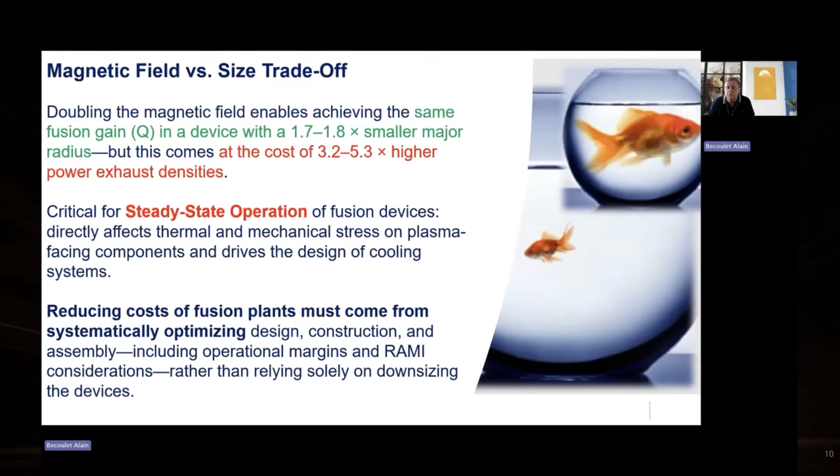Turning to ITER's contribution more rapidly now, clearly ITER is there and was invented and decided to demonstrate the scientific and technical feasibility of fusion as an energy source with the technologies that were available at the time we designed this machine.

It targets Q equal 10 in DT plasma, steady state operation, as I said, so pulses above 400 seconds, which mark thermal equilibrium, up to 1 hour or something, repetitively, of course.

ITER is there to embark the entire nuclear case - licensing, maintenance, deactivation, decommissioning, waste management - in a framework which is the French nuclear facility framework, but adjusting, developing, and validating a fusion case of this kind of licensing.

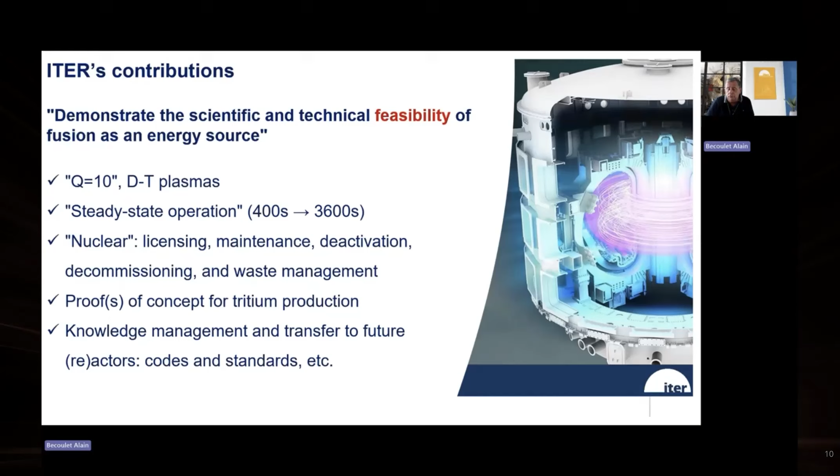We are there also to prove some concepts of tritium production with different technologies, and I'll come back to that. We are here to develop, manage, and transfer the knowledge and know-how to future actors and reactors, of course. I'll come back on that a little bit later.

Along the V cycle of a big project like this, I want to emphasize a couple of elements. Along the conceptual and design part, we have now, for many years, a fully integrated design that we are of course adjusting, correcting, influencing. This design goes with a fully coordinated and consolidated research plan that is developed and validated by the entire fusion community.

And as I said, the nuclear safety case starts from the fission nuclear case of the French regulator, and that is progressively being adjusted, cleared, or adapted to what we need.

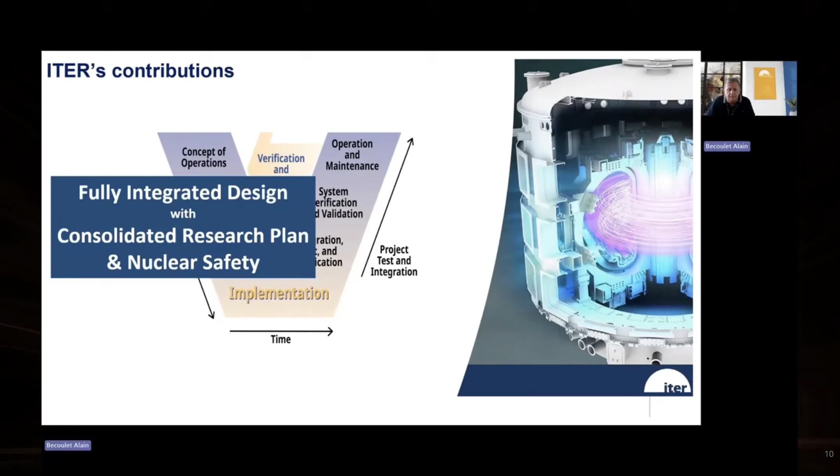Concerning the phase we are in now, of implementation, construction, assembly, and so on, as you know, we have reinforced recently the project management, and in any case we have an integrated project management in a very, very complex organization. We are coordinating 7 domestic agencies who are in connection together with us, with thousands of industries. So this is a big endeavor.

This is also prototyping, but it's important to understand that it's an extremely important endeavor that incites the development of a number of industrial actors. So it is a supply to ITER - not yet a supply chain, but it is really encouraging the development of a fusion supply chain by doing this.

Safety, quality control - all along the integration, the test, and so on, we have been developing and are further improving our safety and quality control. So we are also developing, as much as we can, standards for fusion, which are to be really tested, adapted, and validated.

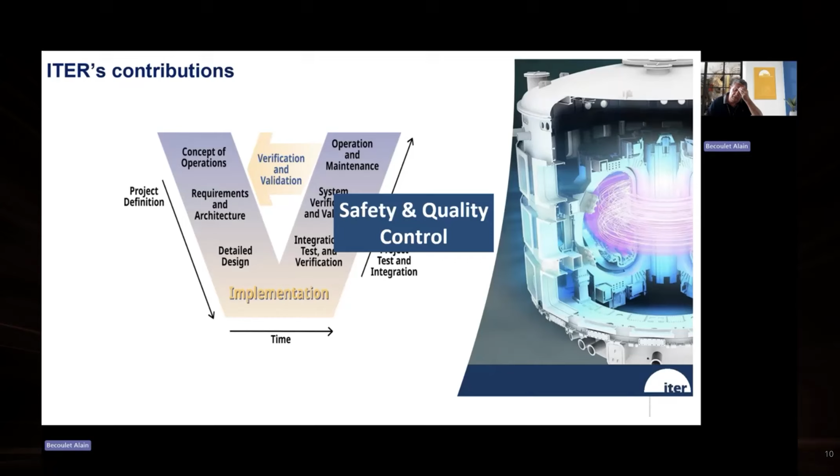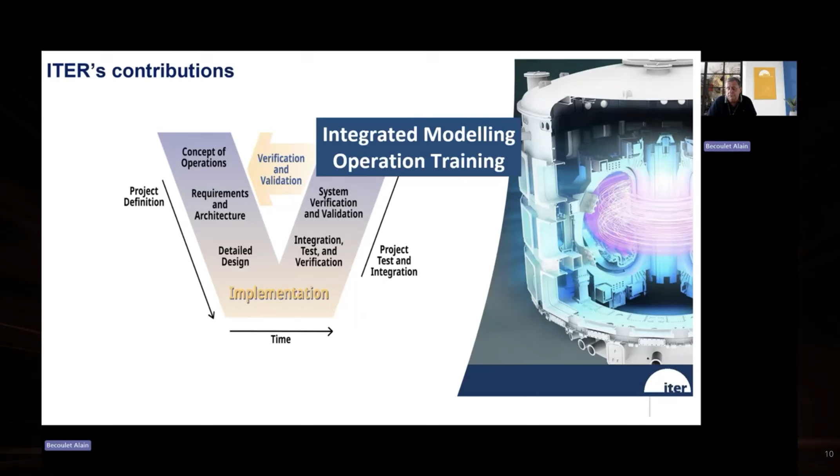And last but not least, we are consolidating, and the ambition is to standardize the integrated modeling, the operation training, and so on, in order that ITER not only delivers Q equal 10 plasma, but delivers a full framework for fusion development.

So all this is covered nowadays. Every single day, ITER is producing knowledge, technology, and know-how. We are working on standards, golden standards, of course industrial ones, and I'll come back to that. We are now putting an overlayer of all this with digitalization and AI assistance.

We have experienced some delays, in particular associated with difficulties to build, simply to manufacture this kind of big components, particularly the vacuum vessel. The dates that we have now have been readjusted after the sequence of delays created 2 years ago by this manufacturing problem, plus other ones.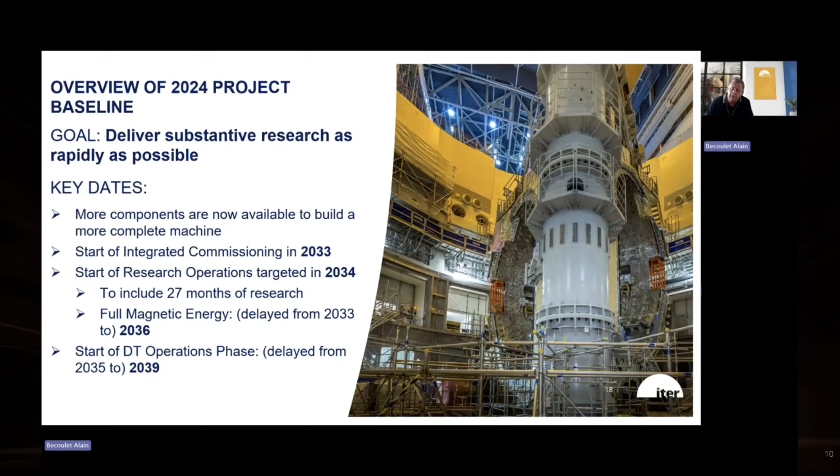The start of the integration commissioning of the machine is planned now in 2033, with the start of research operation immediately after in 2034, the transition to full magnetic energy in '36, and to DT operation around '39. I'm happy and proud to announce that for the past 1.5 years now, we are exactly following our schedule index, and even at a better cost index than planned.

Recently, we have also mutated the ITER facility and adjusted this facility and team to the world that is developing. And in particular, we have engaged into a so-called ITER private sector fusion engagement project, whose motto is: we can go so much faster together.

So we are inviting you guys, we are inviting the entire community, magnetic, non-magnetic, private, public, whatever actors. In May 2024, we hosted the first meeting with 350 participants that we repeated a year after. So we already have connected with a very large number of you.

And we are opening all the channels of our knowledge, the design manual, the access to all the documents that can be accessed. We have almost finished the opening of the integrated modeling suite of ITER codes in full open source. We are establishing bilateral agreements with whoever wants. We are opening our catalogs. We are organizing technical visits and so on. So the list is long. We have given access to the ITPA to private sector, and we are even opening the ITPA to some engineering topics as well. You have the email of the dedicated help desk here. If you want to connect, if you want to work with us, this is open to everyone.

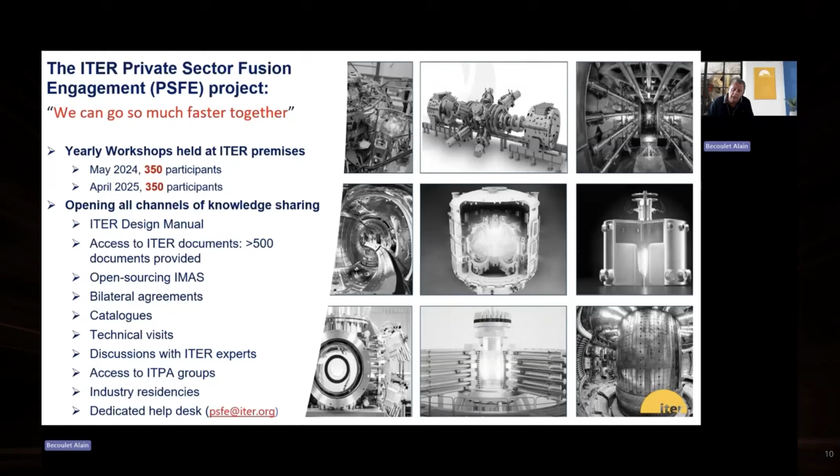Last element, we are, as I said, developing or considering to accelerate and to improve the reliability, availability, efficiency of what we are doing with artificial intelligence. So in very short, we have now developed a strategy that we are submitting this fall to our members, to the council, concerning a very broad development of AI, on all the processes, system engineering processes, the project construction, the quality, the corporate functions, preparation of the operation, maintenance, etc., exploring the frontiers of plasma science together with the fusion community, and developing tools for better training, education, knowledge, and know-how transfer in order that ITER is daily accessible to all the community in terms of what we know and what we are developing.

So my last slide is here, a very important message that I convey on behalf of our Director General as well. We really applaud the fact that the energy and the investments that are put nowadays in fusion are really increasing a lot. This is extremely important. We are happy to see that what we have been altogether developing for decades now becomes a reality, or is at the door of becoming a reality.

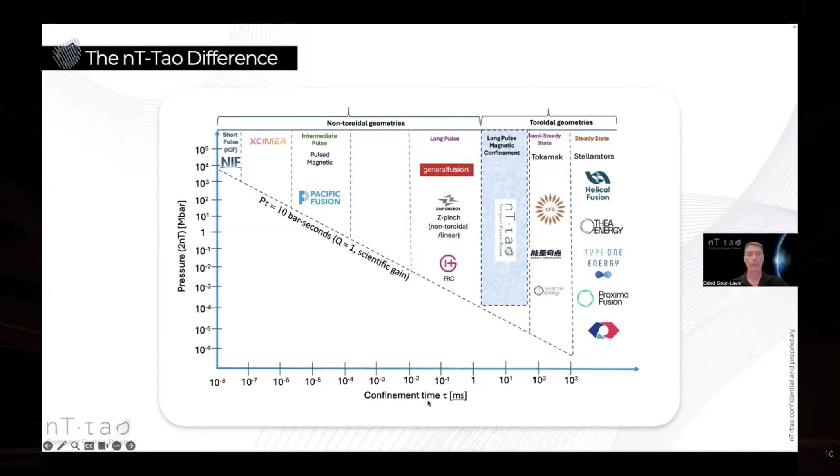The solution we are building uses the backbone of magnetic confinement based on the stellarator design, fast heating by very strong pulse power and power electronic units, and active stabilization fields. All of those combined enable this system to be performed.

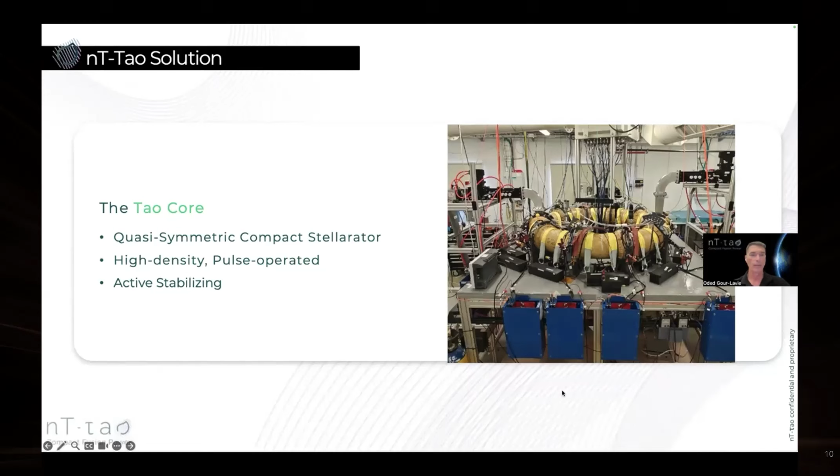This solution incorporates all the parts together, and the engineering milestone that led us to this stage is a very rapid full prototype engineering cycle—from simulation to design to engineering, building, and eventually testing each and every part of the system as components, and then connecting them all together. The validated C2A backbone of the stellarator was tested at the end of last year, and we're continuing and progressing very quickly to the next stages.

The power units you can see here are proprietary power units we've built in order to push those magnets and heat the plasma, all together with the entire system and machines.

We're adding top-notch diagnostics that we've built in collaboration with top institutes in Israel and abroad, all incorporated in order to really get all the information through those experiments. We're also building HTS magnets specifically designed to work under very high pulses. Those magnets are already built and will be tested in a pulsed environment very soon.

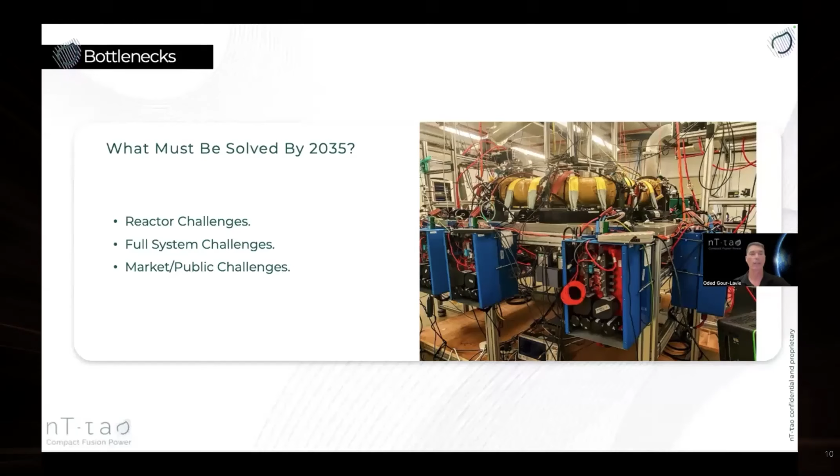The main bottlenecks I divide into three vectors: reactor challenges, full system challenges, and market and public challenges. If we take a look at the reactor challenges, we all have the goal of Q greater than 1.

That's on the engineering side, not the scientific side, and that's a big goal for everyone to achieve, for us as well, obviously.

The next stage, and that's a big issue, is the reactor to electricity path. That's something that part of it can be in collaboration, and part of it is internal to each company. Some companies have their own special means of moving from fusion power to electricity. I believe that will be discussed as well by others.

But we're taking the more conventional path, moving through steam or other means to run a turbine and then a generator. Tritium breeding technology is an essential challenge that everyone using deuterium tritium needs to resolve. Deuterium tritium is the easiest kind of fusion fuel in terms of temperature and energy, but also has the lack of tritium. So tritium breeding is essential, and that's an area for a lot of collaboration possibility in the ecosystem.

Trained workforce, that's essential, and that's a big issue for this decade. When we increase the capability of companies to move faster, but also achieve our goals for 2035, we need a trained workforce. That's another challenge that we have in front of us.

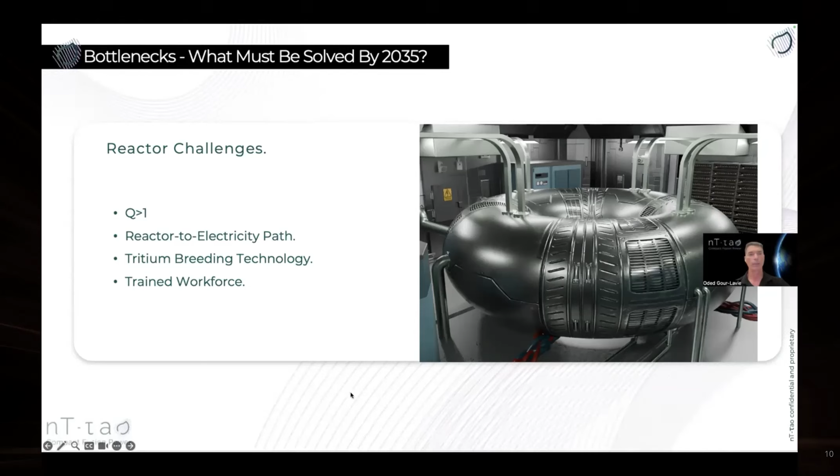Another discussion is full system challenges. First of all, government investment to reduce supply chain constraints. When we discuss specific supply chains, that can be maybe in another discussion, but government can signal suppliers that they can reduce their risk and join the ecosystem and start pushing forward in order to be ready for 2035.

Some of that is mass production and distribution, especially for a compact system like we are planning. Mass production is the way, which will also reduce the cost, but is also something that we need to be prepared for. That's another challenge that we see ahead.

And materials and manufacturing, that precision manufacturing and certain materials that need to be created or developed for plasma-facing materials, etc., and other elements in the machines, that's also an area for collaboration, and a lot of that can be done to reduce risk mutually.

And then the last bottleneck we want to discuss is market and public challenges. First of all, more private and public investment is required for the R&D phase, but also for the reduced process of going into market and creating the first of a kind, etc. So that's part of the challenge for the public.

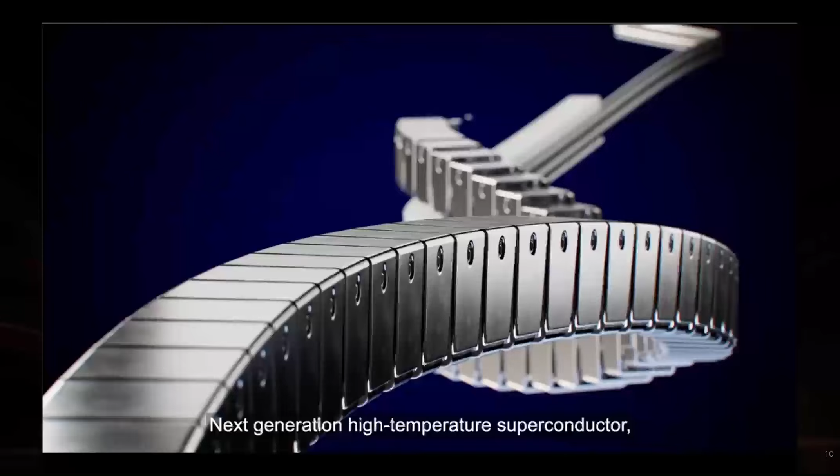Humankind has been seeking to emulate how the sun creates its energy since the middle of the last century. But creating the reactions in the sun down on Earth is incredibly complex, and solving it will take groundbreaking technology. Helical Fusion is developing pioneering ways of achieving predictable, clean, baseload energy for the planet, starting with a relatively small piece of ingenuity. At its core are layers of advanced superconducting materials. Next-generation high-temperature superconductor, or HTS, cables enable stronger magnetic fields, making the reactors smaller, more powerful, and more efficient.

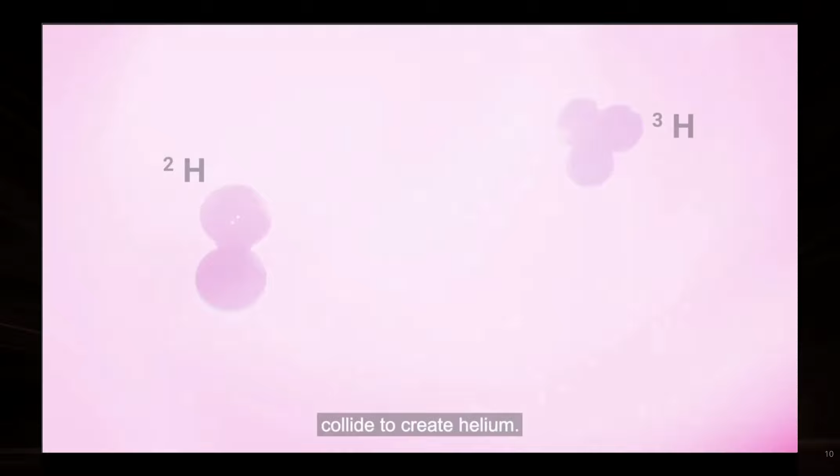Hundreds of these HTS cables will combine to create groundbreaking high-temperature superconducting magnets. Crucially, because the HTS cables are designed to be flexible, they enable a unique geometry, a double helix, two spirals that form the very framework of the reactor. This double helix will provide an unimaginably strong magnetic cage to hold the plasma, the energy source of the reactor. The plasma will be 10 times hotter than the core of the sun, and so can't be in contact with anything. Inside the hot plasma, two hydrogen atoms, deuterium and tritium, collide to create helium, a process that carries no risk of runaway reaction. But crucially, this reaction leaves a spare neutron.

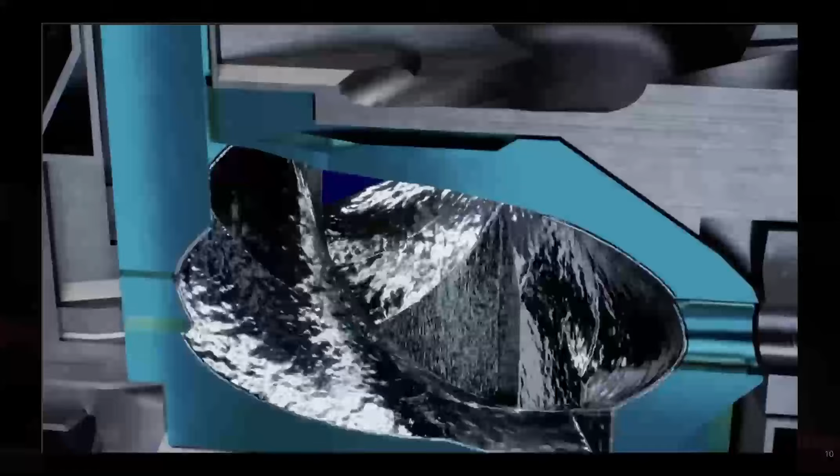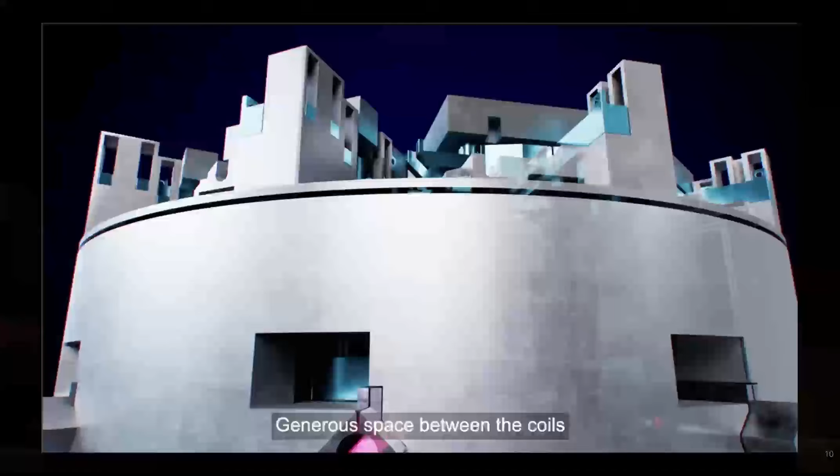As E equals mc squared explains, this neutron carries a huge amount of energy. In order to harness the energy from the neutrons, the plasma will be surrounded by special structures called a blanket. Here, the Helical Stellarator power plant will have another piece of ingenuity that separates it from other reactors: the inside surface of the blanket will be covered in liquid metal flow. Helical Fusion is developing a system so the blanket can efficiently carry heat out of the reactor, a liquid metal blanket. Generous space between the coils means blanket parts can be swapped quickly, enabling faster maintenance and higher plant uptime.

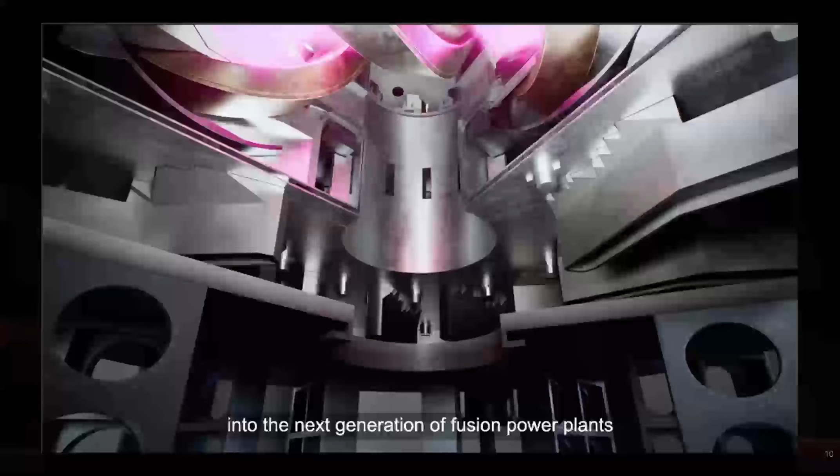Helical Fusion's design builds on the legacy of Japan's Large Helical Device, LHD. One of the world's most advanced stellarators, the LHD has achieved over 3,000 seconds of steady-state plasma, proving the stability of this approach. We are now bringing this proven foundation into the next generation of fusion power plants to bring clean, predictable power to the grid, helping humanity evolve through fusion energy for generations to come.